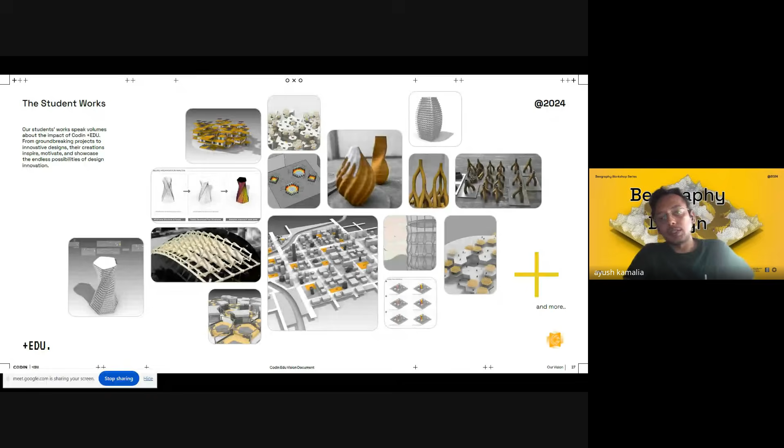It's me, Safid, and Divya, who will be taking care of the workshops today. Our mission and some of the works from our previous courses: both online, offline, digital fabrication, sustainability. So it's like a big range of courses.

Without wasting any further time, we are done with the intros, and let me just quickly tell you what is on the cards today. So this is workshop 2.

There are a total of 4 workshops in this whole series, once every month. It is usually on the second Saturday of every month. So the next will be happening on the second Saturday of September, and the final one in October. And we are going category wise.

Today we will be looking into 3 categories. The first one is lighting fixtures. This will be happening at 12:15 to 1 GMT, so just convert it into your local time. This is the kind of things we will cover in this session, which will be the first session of the day. Then we will have a small break and a Q&A session.

And then we will go to the second category for the day, which is DIY and engineering. Divya will be heading this. He has a master's in digital fabrication design from UCL London and is a domain expert in this area. We will be learning to create a frame of a drone which you can 3D print at your home.

And the final session today will be from 2:15 to 3, which will be about urban furniture, and we will look into these kind of waffle outdoor furnitures.

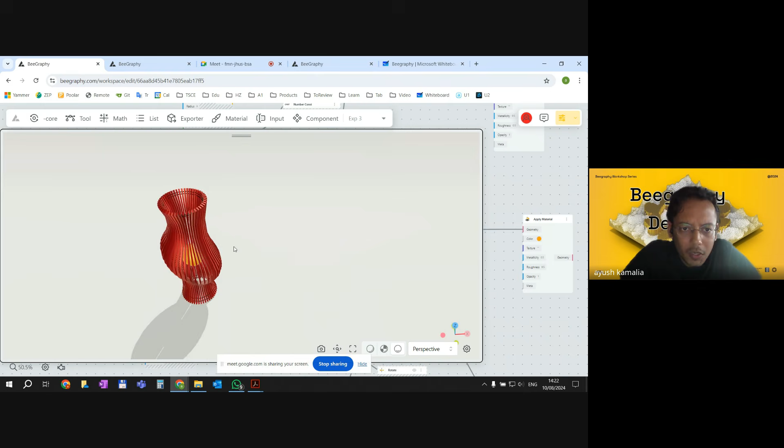So what happens when I see the geometry, what I realize is that it is predominantly an extruded cylinder, but there is this tilt in the center. If I look from the front side, I realize that this bulge is not parallel to the horizontal plane.

Like if there is a circle here and a circle here, this circle is not straight, it is not parallel, it is somewhat tilted. So if I just try to draw it, what it may look like, let's say this is our circle on the top, this is our circle on the bottom. Rather than being parallel to our two circles, the top and bottom, this seems to be tilted in this fashion, the one which you can see in the red line.

Exactly. So this is somehow we want, this is like the first apparent thing which I can see.

Again, one thing related to parametric design in general, I would like to share that there is no right or wrong method in parametric or computational design. There are hundreds of ways that the same result can be achieved. In the time constraint that we have today, I will be following one or two approaches to reach this particular end result, but that doesn't mean all the other ways of reaching the same form are wrong. There is no right or wrong, there is just more efficient and less efficient ways.

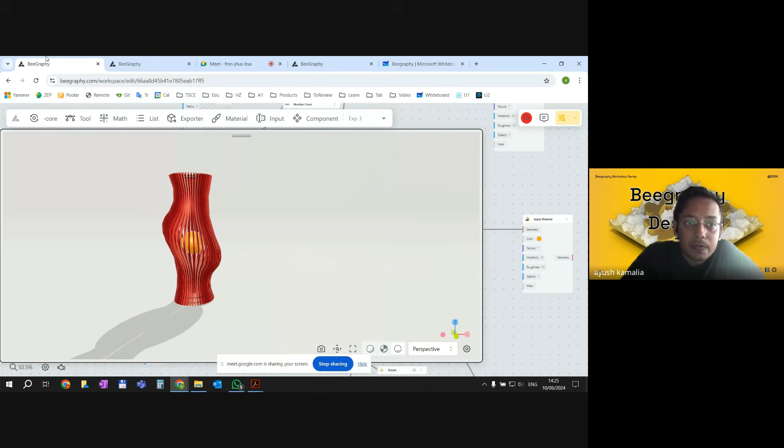So one thing we are clear on now is that there is this one circle we want on the top, which is horizontal, one circle we want on the bottom, which is again horizontal, and then there is the tilted circle in the middle. If we are able to somehow connect all of them smoothly, we get closer to what this form is trying to achieve. But certainly not in two dimensions, it is all happening in three dimensions, in circles and cylinders.

So let's be easy, let's start slowly and put these three circles in and then see what happens. Let's start with the bottommost circle, and you can choose whatever size. It's mainly based on proportions rather than trying to identify the actual size at the moment, because we are in the exploration phase. So let's say I am having the bottom radius, which is this red circle, as 3 here.

The good part about BeeGraphy is that I do not need a separate component or element for all the input. In Grasshopper, it's not very easy to embed the inputs, it's more preferred to add them through a panel or a number slider. But here, I can just click on the numbers after this to change them. So if I want a radius 3 instead of 4, it is much quicker.

If I do something in this fashion where I create a number constant and write the number as 3 here, and then connect it to this one, it gives us the same result, the circle is exactly the same. It's just that if I write the number directly here, we are a bit faster. But if you want it to be a parametric component, then we can definitely add a range or a number slider if we want it to be varied. But let's start with a simple approach where we can directly add the number here.

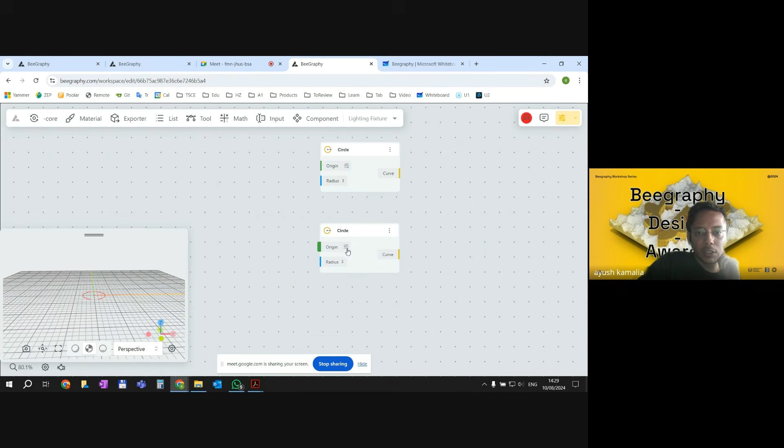So, bottom and top circle, the radius and size are exactly the same as in this geometry. It's just that rather than being located on the ground level, it is on a higher plane. How can I define a higher plane? The radius is already 3, so I can simply change the z point to a positive higher number. If I do that, I see this circle is now placed here. If I play around a bit, if I put 10 here, it will be at positive 10, and if I do 20, it will be at a higher level, and so on. Let's go with 21 at the moment.

So I need 3 circles. I have the top one and the bottom one. Now let's get the tricky one, which is the center. We already know that the center circle will be slightly bigger. So to have a slightly bigger circle, the simplest method is to just increase the radius of the circle. Let's try to do that.

I'm copying the circle at the very bottom. When I click this, the yellow thing appears here, which means the circle is located here. We already agreed that we need a larger circle, so its radius should be higher. Let me increase the radius to 5 from 3 to make it a bit bigger. I can see there is a larger circle now, but the circle is not here - it's somewhere in between the top and the bottom circle. It's at 0 z point, and this is at 21 z point.

So let's take 10 or 11 to get the middle point. To change the location of the circle, I simply change the value in the origin. So remember, if you want to change the location of your circle, change the origin point. If you want to change the size of your circle, change the radius. We used both of them now.

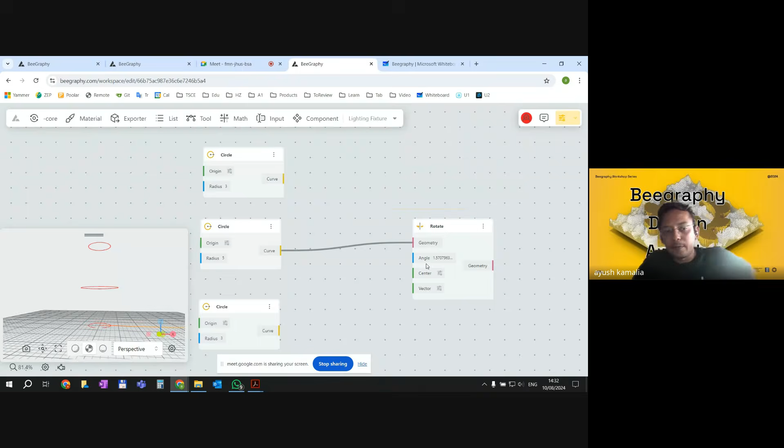Angle - this is one thing to remember: the input for all components, wherever an angle is required in BeeGraphy, is by default in radians. Personally, if you're familiar with radians, you can directly change the values here, but I'm more familiar with the degree convention. So there's already a command called degree to radian, DEG to RAD. I can just use this command and add it here, then choose the value here. Just as a placeholder, let me put 45 degrees for now.

Okay, now I have to put center. At what point would I like to rotate this? What is the axis of rotation? If we go back to our small ugly design, we can see that we want to rotate our central circle. This means what we want to rotate along is this point, the yellow point, which is the centroid or center point of this blue circle here. But I do not know what is the centroid of this blue circle, I just have a circle right now.

So to get a centroid, again very intuitive, very simple, I just type centroid to get the centroid option. I put the circle into it, and then I get the centroid, which is this yellow point, exactly the same yellow point which we are expecting to rotate our design at. And then I connect the center point to the center here.

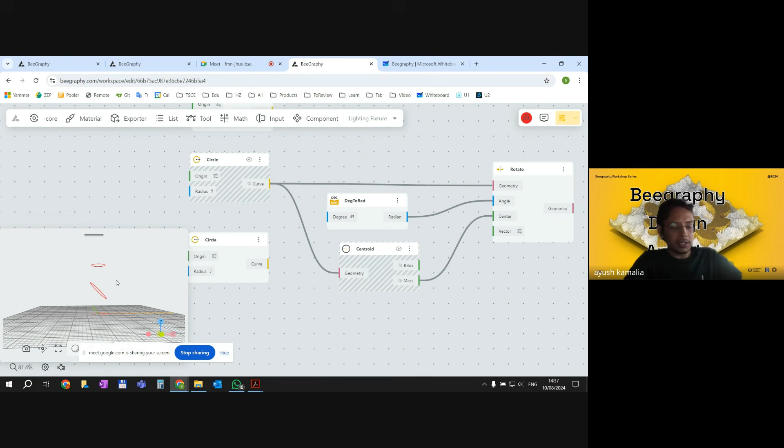Great, our first step is fully done. Now, what was our next step? Our next step was to create a smooth boundary around them. You see the new yellow thing which I'm adding, we now somehow have to connect them as a surface rather than being individual circles.

The immediate thing to do is to use a command known as loft surface. Now we simply have to add 1, 2, 3 curves in it and then see what happens. It is important that the order of the curve that goes inside the loft is maintained, so either go from top to down or bottom to top, but in the correct order.

A more clean way to do it is to use this component known as merge. Merge combines all the data streams, the data coming from these 3 curves, and then it will be lofted together. So going from bottom to top, I add the first curve here, the second curve, which is the middle one, by pressing the shift key, and then finally the third curve here. Then if I add it to the loft command, I see something happens.

But I realize it is not what I intended to achieve, it is not looking like this. Because what is happening right now, if I just draw a quick sketch again, I have one circle here, a second circle here, and a third circle here. If you just see this geometry, this is what our situation is. And now lofting the 3 of them, it is combining the extreme ends of the three together in something like this.

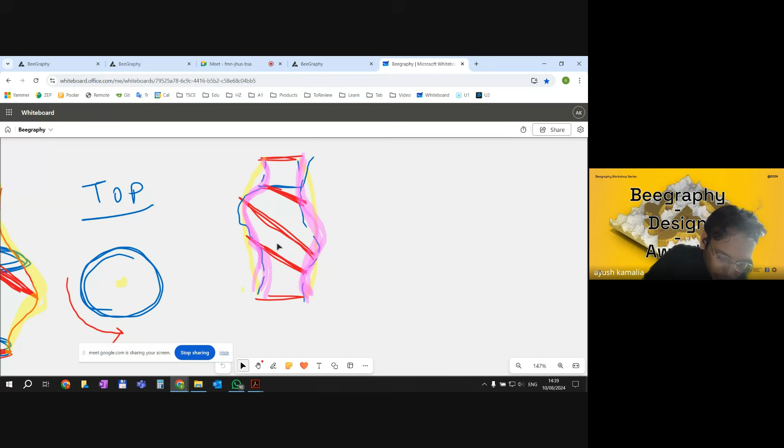This bulging thing, shown in the blue dashed line, is not happening. So how can we achieve this bulging? If we add one more circle here and another circle here, it will try to follow the outer points of all 5 circles instead of just the 3 circles. So hopefully, by adding these two circles, we are able to get closer to the form here. Let's try that and see if it happens.

One thing is, let's give it a slight thought whether we want to add a circle or an ellipse here. You might be wondering why the ellipse is coming into picture. If you see, this circle is actually like a tilted or rotated circle.

So what happens if, let's say this is my circle, if I rotate it, it will be rotated like this. Its width is getting reduced. The pink line, you see I'm getting like a gap here after rotation. Let me show it on the top view.

This is the top view. If this is the circle, I'm drawing the rotated circle with red. This will be the rotated circle. But I do not want this. We want the circle to be precisely a cylinder in the top part and the bottom part.

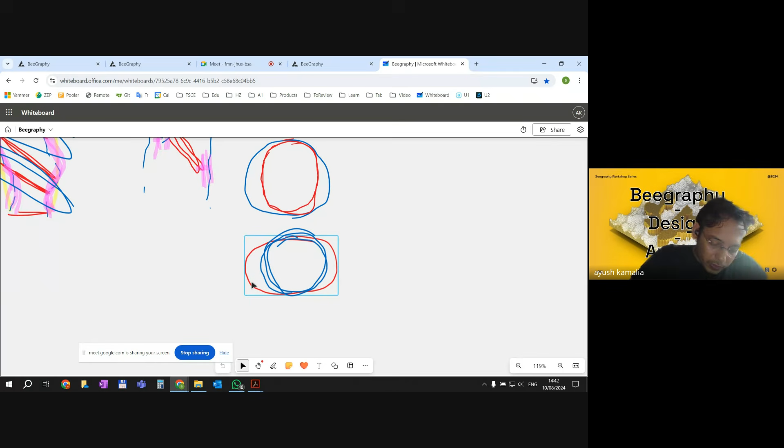Going to this drawing again on the left, we wanted to have the cylinder. This is the circle on top. If I have an ellipse here, slightly bigger on this side, after rotation I will get an ellipse having the same dimension as my circle on top. This is because we are rotating it.

It is better to go with an ellipse, and then we can get a perfect cylinder. You can try it with a circle as well, give it a hit and trial, and see whether you like that feel, that appeal of the circle. Otherwise, go with an ellipse.

And if I want an ellipse, what I will do is just type an ellipse. Right now, I cannot see where my ellipse is coming because I have this lofted surface here. So to hide it, we can quickly go to the lofted surface and press hide. And then things become much more cleaner again.

Okay, my ellipse is here. I want it to be somewhere here. I know that this was my center point, which is 10. I used it for this circle. So I have to go higher than this. I can just put the origin on the z-axis to 13, 14. I can't decide, so let me put 13 and a half.

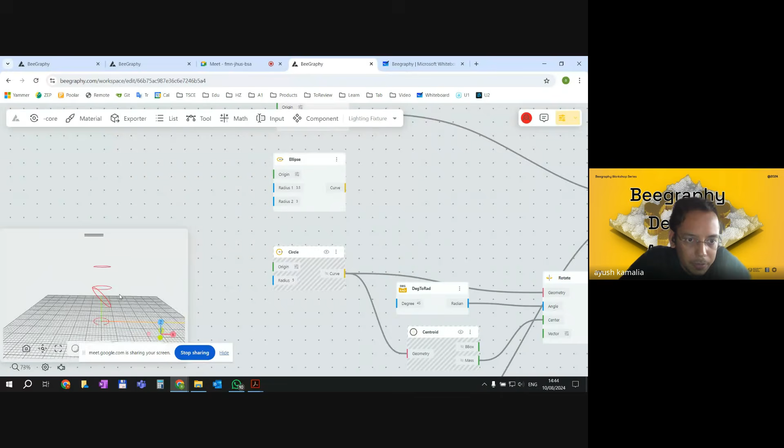Perfect, so now I have an ellipse here, but it is not rotated yet. I need to rotate it exactly the same way as the circle in the center. We have to follow the same approach that I followed here for the center circle.

We use the component known as rotate. Simple, rotate geometry goes to geometry. To rotate around a certain axis, I need the center. Again, centroid, curve geometry, centroid, and the point goes there. I have the center here now. I do not want to see this point, so I just hide it.

How much I want to rotate it is exactly the same as this one, so I can directly connect the same radian input which I created for the center circle to attach here as well. I see it doesn't seem to be rotating around. It's again the same thing, we need to decide the axis it's rotating along. By default it is along the z-axis. I put the z to 0. We want it along the y because we did the same for the center one, so I put the 1 to y.

It looks a bit messy. If I just hide it, I can see clearly that now it is more or less the same size and it is getting sliced properly. But I think that this angle is very strong right now, I need a slightly lesser rotation. So I can change the angle here to 30 degrees and see what happens. But visually, it looks pretty fine to me at the moment.

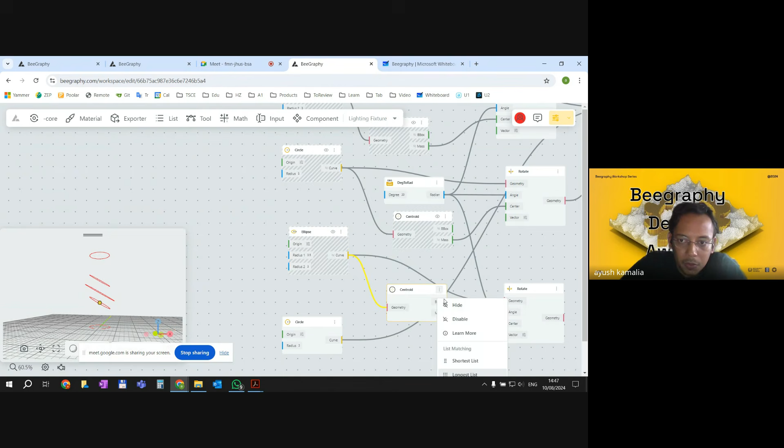And now we have like 5 circles here, exactly the 5 red lines that we wanted to have. And the good part is, if I change the angle here, all 3 angles get changed together, which is pretty helpful for me.

Okay, now let's add all of these 5 things to the loft and see what happens, whether I'm able to achieve the geometry I imagine or not.

If you remember, few minutes ago, I told you that it is imperative to go sequentially in assigning the surfaces, assigning the curves. So you can either go top to bottom or bottom to top, but they have to be in series. I cannot insert this circle in between the already merged list, so I start providing all the data right from the beginning.

Again, going from bottom to top. So this is my extreme bottom ellipse. This is my ellipse right on top of it, so keep pressing the shift key and add it to the list. This is my ellipse, this is my circle, central circle, the biggest one, keep pressing shift, add it. Now I want this ellipse, which is this one precisely. Yes. And now the top circle, which is not this, but the one at the bottom in my case. And this. So it doesn't matter where the stuff is located on your canvas, just the order of providing the input to the merge list needs to be taken care of properly.

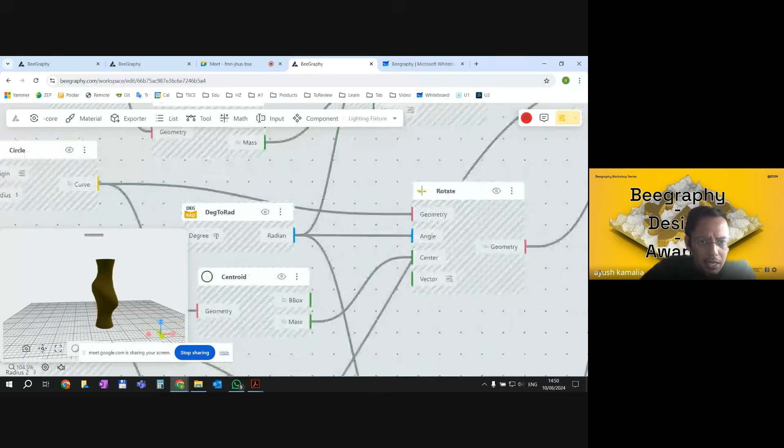If I change the angles, let's say from 30 to 35, okay perfect, change a bit, everything, and it looks good.

Let's say if I want it to be a bit taller, I can just change my top circle height a bit. So right now it is at 21, let me make it 24. It's higher, great, I like it even better now. So let us go ahead with this.

It's very important to understand parametric design is about parameters, and you are allowed to change parameters anytime during the workflow. Creating an algorithm is not a linear process; modifying the geometry and form is based on how you want to achieve it. So I like this one better now, I just go ahead with it. It's not finalized yet, I'm just writing a script right now. After 10 minutes I may come back and change some parameters again, but I don't have to write the script again, I'm just changing a few parameters and getting a new form out of it.

So this was the most tricky and parametrically intensive part, to identify exactly what we are doing. It's very interesting to see that with just basic primary geometry like a circle, we are able to get this parametric form.

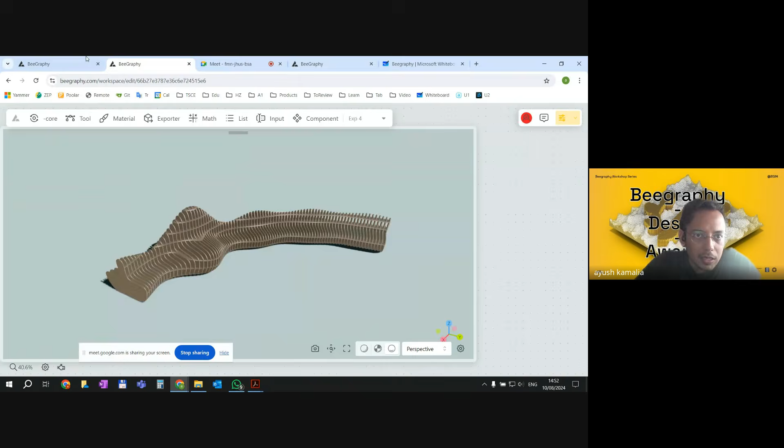Now I want to create a finned structure with a width to it. I don't want a surface, I want these individual panels rotating around. For this, I need a thickness, how thick I want these panels to be. If I want to add thickness, what command can we use?

Solid thickness, no points for guessing this one because as you know, Grasshopper is very intuitive. Whatever you want to achieve, just try to type it out and there's a very high probability you will get a component which does exactly that. So what kind of input needs to be provided? It just needs a surface and a thickness, how thick I want it to be. So it converts a surface into a solid of a particular thickness.

Right now the solid thickness is 2, the surface is the surface input. Let me just provide the surface and see what happens. I hide this one. It is extremely thick, I have no space in my geometry.

So I want it to be thinner, but I want the mass, the thickness being added, to not be added inside the geometrical surface but rather outside. What we can do is simple: rather than having a plus dimension, let's add a minus in front of it. So rather than +2, if I do a -2, what happens? Now the whole thickness addition goes to the outside, but it's super thick for my taste right now.

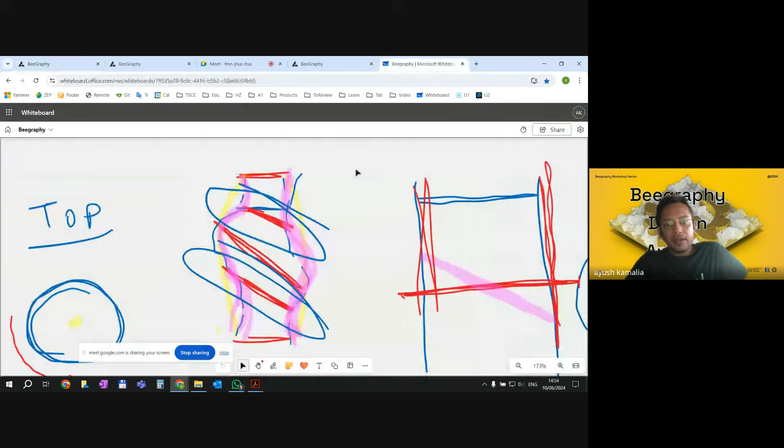So you see, in just 20, 30 minutes we are able to get this solid geometry, which looks pretty cool. But at the end of the day, what we are creating is a light fixture. This is a solid, there are no gaps for the light to come out from this one. So I need openings here, just thin slits rotating around.

And how can we do that? For that, there are thousands of ways to do it, thousands of permutations and combinations, but we're probably going to go with something related to solid intersection, and then create these individual slits. So how does a solid intersection work?

Let us see on this canvas itself. If I have a solid cuboid, and then I have another solid cuboid with some part where they are overlapping, the place where they overlap will be the result of the solid intersection. So what is happening is that I provide two solids as input, we intersect them, and whatever is the common solid between these two will be given as the output.

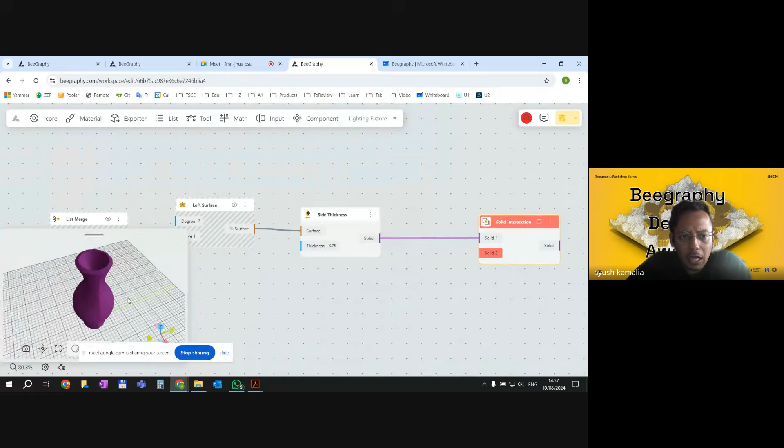How about we create plain rectangular slits, rotated around the geometry, and then we use them. Let me show you what I mean.

Let's create a plywood panel with some thickness, like a solid cuboid, a box. So let's create a box kind of thing. But this is not the ideal box. There are other ways to create a box. Yes, I can create a box by 2 points.

Perfect. So I need a box which is at least the height and which is intersecting. Let me show you again what I mean.

Let's say I already have this solid geometry. It doesn't look like what we have, but just imagine that it's the same thing, the red geometry. What I want to do is create a cuboidal box here. And when we intersect them, what will be the result? It will be one panel of lighting for me, a single panel.

And then I can copy the singular slit, rotate it around, copy it in a circular fashion, and hopefully I will be able to achieve it. So let's give it a try.

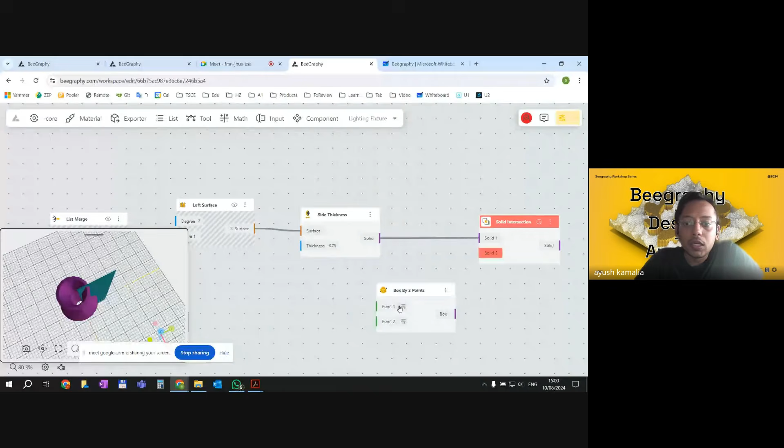So yeah, this looks good. I have a solid box. If I intersect them, let's see what happens.

The Boolean operations are pretty computationally intensive, so it takes some time. Let me hide them and let's see what happens. It's the reverse thing that happened. I actually wanted this slit thing to remain, but it created the other one.

So what we will do is just shift, we can change solid 1 and solid 2.

To remind you, solid functionalities are pretty computationally intensive, so use them wisely, do not change them too often. Okay, something is not going as expected. Let's keep on creating our stuff.

And then let's see what happens in the very end. In the meantime, I can disable this component so that it doesn't take our computation power.

What is happening right now is there is only one panel. We want it to be there all around. So how can we do that? There is something known as a polar array.

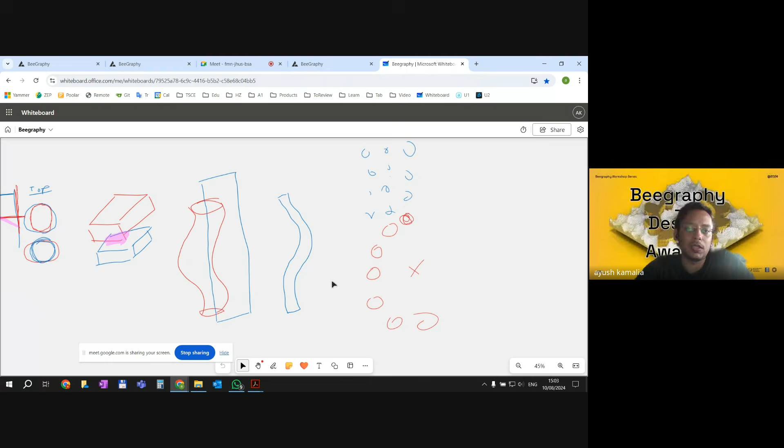Then let's do polar array. I want the box to be moved, and perfect, this is what I expected, that it is rotating all around.

And we can just directly set the count here, how many boxes we want. Let's say I want to have 25 boxes, so let's say 25 slits around. You can change how dense you want it, how much light you want it to be coming out.

But yeah, pretty much sorted, I have a polar array working well. And then let us do solid intersection again, let's try if it happens this time.

And this is the geometry. So I want my central solid to be intersected with all of these panels, and the resultant should be our panel creation.

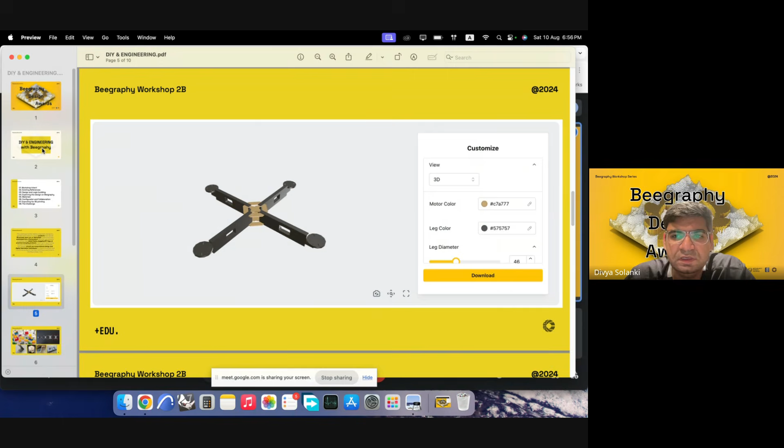It can be 3D printed or laser cut. There are other examples as well, like toys, drone frames, phone stands, small laser cut objects, stands for tablets, or any fixtures that could be utilized in the house. We can also use it for molds, for construction, or to be used for other fabrication technologies like pottery or lost wax casting.

So what we'll be exploring today is a drone setup. I'll take everyone again through the parts. Everyone is familiar with the object - it has a body in the middle, and arms on four corners. These arms are then attached to a propeller unit. The propeller's function is to raise it up by rotating.

So it requires a power source, provided by a battery. Most drones have camera units, but they could add additional functions to the drones. We can see there's a camera unit, and an antenna which would link to the control unit in our hands. So that's the general assembly.

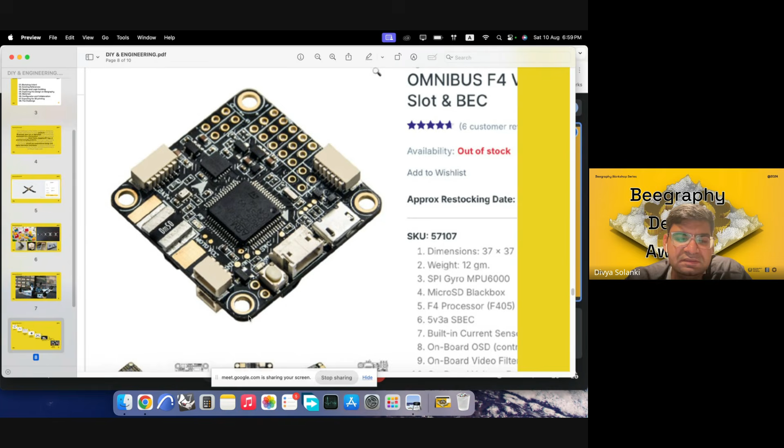After that research is done, it can help us in modeling, because each of these units would come with certain connector dimensions. So this one has screws, and this could be attached through screws or nuts. We need to understand what the sizes of those are. Once market research is done, it can help us in modeling.

Once we have modeled, we can then start fabricating. After fabricating, we go back into a feedback loop - if we face some issues, we go back to the fabrication or we go back to the modeling. That loop continues until we have a refined product that is tested. So yeah, that's the general DIY workflow.

Market research can easily be done online. You can find various websites which give you parts, some of which can be very cheap to acquire, so we don't have to invest our time and money into modeling them or 3D printing them. We also have to look for these connector parts, which could be very useful because we already know what is feasible, and then we'll make connections accordingly.

So today we'll try to attempt the drone body. As you can see, there's a central body and there are 4 arms on each corner. I'll take us to the whiteboard. Is the whiteboard visible? Yes, okay, I see it.

So I'll start - we need to break this form down into parts that we can then fabricate. The first part I see when I look at this geometry is that we require a squarish body, which is the center part, and then we require arms coming out of the squarish body on either corners, on all the corners. We can use operations such as solid union to join them all together so that they become a single body part.

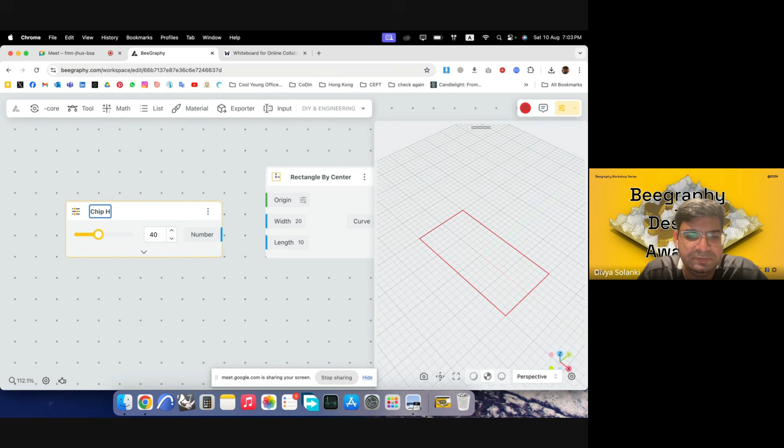I'll write 40, and I'll go with a range input so we can use it for the configurator mode. I'll write chip housing, so chip housing dimension, and this will go into this and this.

Now this is the size we require for the chipset, and we'll make a frame out of it which is slightly larger. So we have made a rectangle, and we can try making another rectangle which is slightly larger.

Here I would try to make it parametric, so say I want the frame width to be around 10 millimeters or 1 centimeter. I'll use a range input, and I can rename it, or we can just say body frame. Then what I will do is add this frame to the chip housing.

So basically I have an inner one, and then I want some distance of that housing from the edge of the body so that we have some stiffness in those areas. So this is where the chip will house, and this is the frame of it.

Now we want to develop the parts where the arms will attach to the body. So for that I will first -- this particular geometry has been generated from the origin point, which is in the middle here.

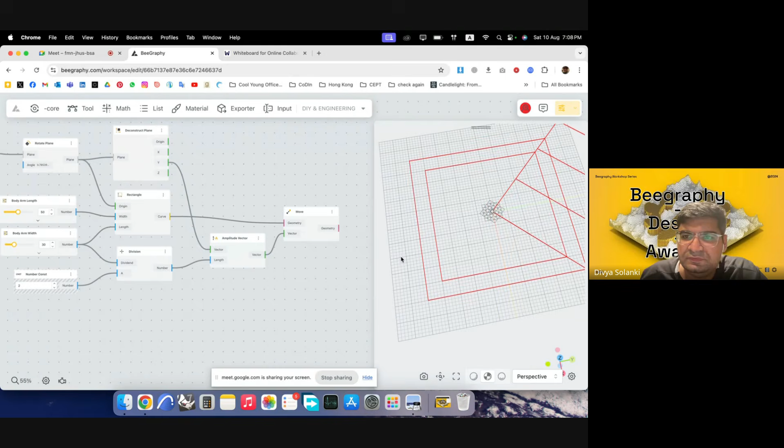Oh, it was the y direction. So if I preview... oh, this has gone further. So we need to give it an opposite vector. I'll use opposite to change my positive number to negative number. And then we can see it is now in the center.

Great, so we have this particular arm. Now we can rotate this arm around so that we have 4 of them attached to the body. I'll hide this and use polar array. By default, the count is 4, and the angle is 360 degrees, so it would by default do what we expect it to do. I won't be changing that, but we can always introduce or increase the number here.

Point is the center point. Again, by default that is the 0,0 coordinate, so I won't have to change that. Vector and angle, it's in radians right now, that's why it's written 6.

Okay, so we have the body and we have the arms. Maybe I can increase the body size a bit, I can go with, say, 50, so that it's slightly outside. Let's try to merge all of these shapes together, so I'll introduce a component called region union. We can use this to merge multiple closed curves.

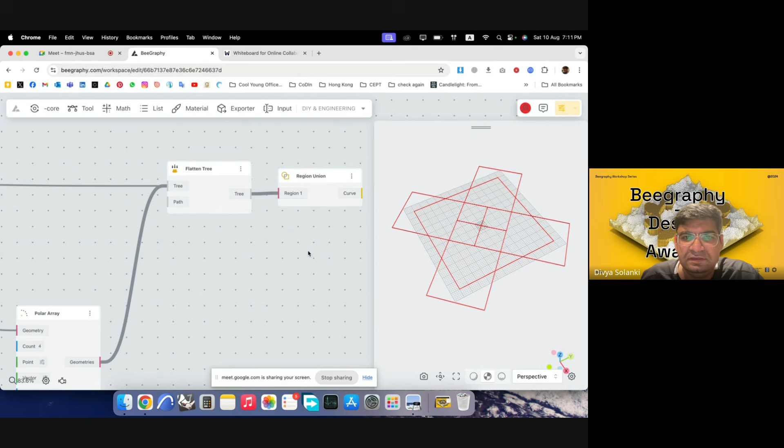So we would have to flatten the input first, so I'll use flatten tree for that. I can press shift and control to plug all the data into flatten, and then send it to the input. So I'll preview of this whole previous part. As you can see, we have a body now, outline of a body now.

We can make it a bit smoother, I guess we can use... we had fillet in this, but we can also try chamfer. So I'll just use chamfer curve, I'll put in curve, and you can see it is asking for two inputs for the chamfering.

So we can go with, say, 5 millimeters range input. I'll change the name of it to body chamfer. I'll plug this in to both of the inputs, and I'll preview of the previous part.

So we have the outline of the body with us, we just need to extrude this. If we extrude it without making it into a surface, then we will only have the outer walls. I can show you that: extrude curve. So when I do this, I only have the outer walls, I don't have the base.

But we can use capping for making it into a solid, so let's go ahead with this only. I will just copy the previous slider, change this to body height, and I'll plug this in. Oh, it needs to be a vector, sorry. So we'll introduce a Z vector, plug in there and put that here.

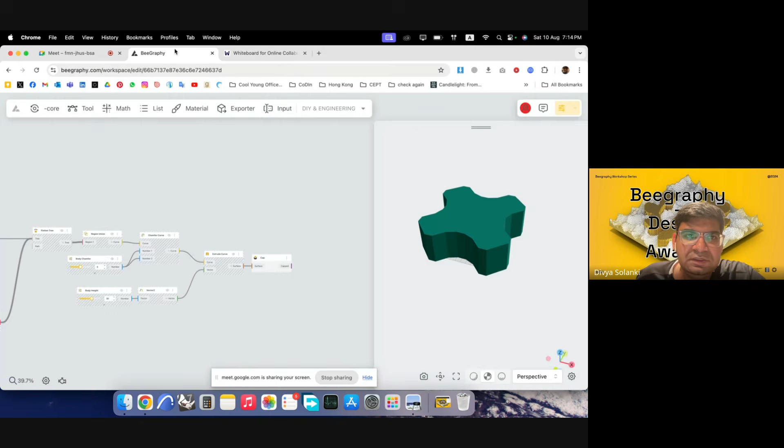So the first part is we require a housing for the chip on the top, and then we require a housing for the battery on the bottom. So we can start with, I think, the chip first. We require, again, we'll go with solid operations. So we are required to make a rectangle above here, and then we'll subtract the rectangle from the body.

So if I go back, I already have that rectangle ready on the base. Now I'd like to move this up to this part because I want to subtract it from the top, so I'll use move.

I'll give it a direction, which is Z. We already have a height for the body, so I'll just move this component ahead. We already have a height for the body, which was this one, and it already has a Z vector, so we might not even require it to be given. So our rectangle has moved up.

Maybe we can give it a fillet so that it's a bit smoother. Fillet geometry, I'll put this in, and then I can give it a radius, say 5. I'll go with a range only. So this would be chip housing fillet. I'll put this here, and I'll preview the previous one.

As you can see, we have an outline for the housing. Now we would want to develop a solid here, and then subtract it from the base. So for that, I will extrude this geometry down.

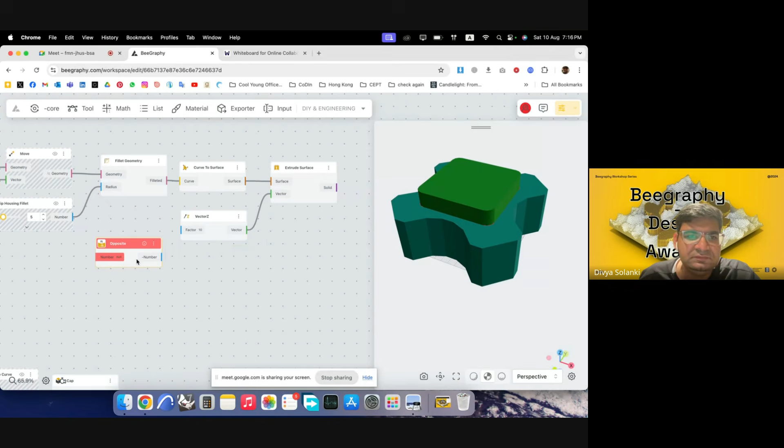It has to be extruded in the opposite direction, so we'll give it a Z vector, and then give it an opposite, and then a depth. So this would be chip housing depth, and I'll put this in here.

If I click on this, it might not be visible. I can preview this off for now. Yeah, so we have an object which is going down, extruding down.

Now we'll subtract this object from the other object to get the difference. So I'll use solid difference, and we have solid difference. What we'll do is give it this first and then this, at zero level, zero level.

Maybe I'll try to swap these two and then preview. Yeah, so we have a cavity there. I hope it's visible, the color is a bit dark. But yeah, there's a cavity, and then we can always increase the depth of the housing if required, or decrease the depth. So that is where our chip will be stored.

Okay, great. So now we can move on to the next part, which is the housing for the battery at the base. The battery also comes in multiple sizes, its height could range, it could be two batteries together, or a bunch of multiple batteries together, because the propeller can be a bit power hungry.

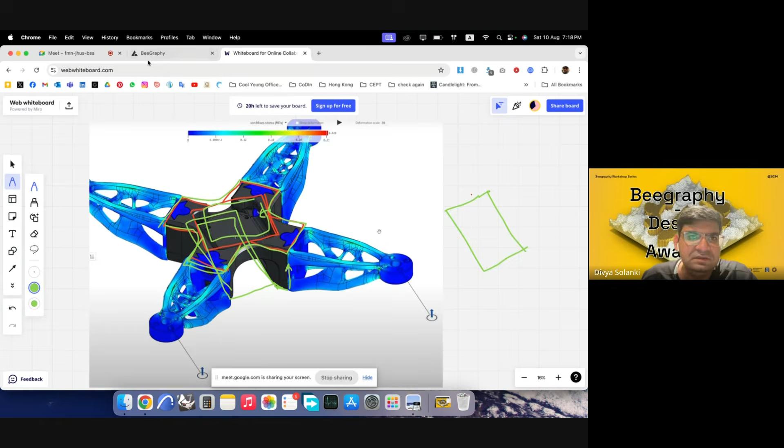So we can go with, say, 30 range input. This would be our battery housing width. Then I'll copy this down, and I'll change this to housing length. This goes here, that goes there.

I can then increase this to, say, 60, probably more, 100, so that it goes slightly outside of our drone body, so that I can subtract and have a cavity here. So I think this would work.

Then what we can do is extrude, or maybe first make it into a surface. So curve to surface, and then we can extrude this curve, extrude the surface, and give it a height.

We want it in the Z direction, and then we can go with, say, it's 10 right now, we can keep it 10 only. So 10 range input, and we can change it to battery housing height. I'll put this in here.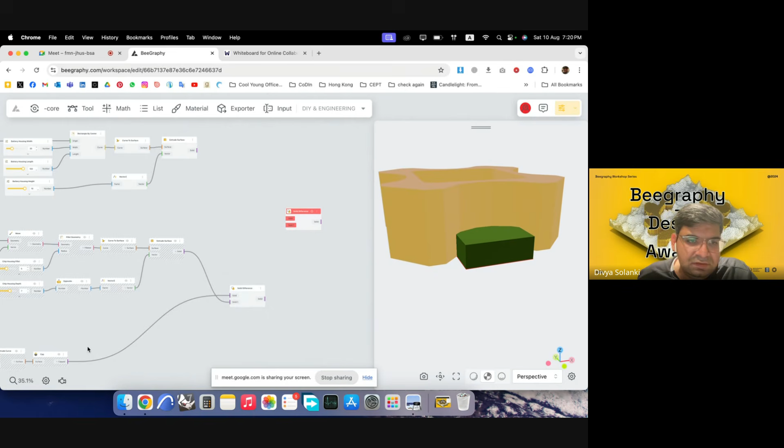Great, so now we have that. And then if I take this forward, we can then Boolean. So again, Boolean difference, just like difference, solid difference, and then it looked like this one would go into this, and this one would go into this. And then I'll just preview.

I think it did the opposite, so I'll just use this and this. Okay, maybe I'll just move the plane a bit lower, say by 1 millimeter.

Would you guys know why this might be the case? Try reloading the script once. Okay.

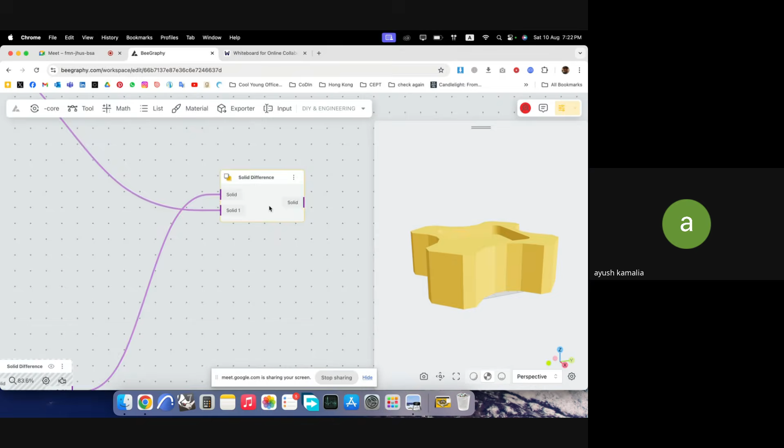It was working previously. Yeah, there might be some backend issue at the moment, so maybe we can just proceed, and because the concept is...

Okay, what is the problem? It's just that there's two objects that I want to subtract, like solid difference, and it's unable to do that. If I increase the height, would that affect it? Like it's doing the other way.

Seems to be intersecting at least, I think. Yeah, it is, but for some reason it's not. Are there two geometries over there? Maybe blue and green? Yeah, there are two geometries, blue and green. Okay, seems to be not.

Can you maybe turn off the blue one for a second? Which one, the blue geometry which is there? Can you turn it off and just try the intersection with green and the magenta one?

It's still not happening. Interesting, I'll look into it.

Okay, anyway, we'll have that base. I'll show it, there's a script already ready on the back. I'll probably show it later. Maybe we can move on to generating the arms.

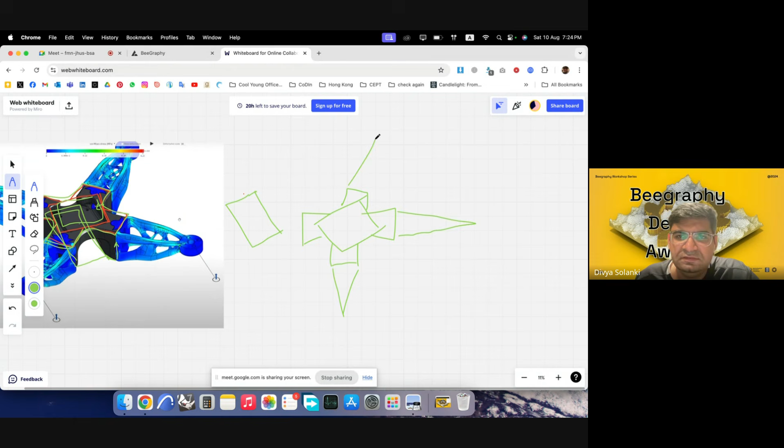These ones, so let's go ahead. I'll go back to the whiteboard. So we have a base frame, and then we have the arms that go out. And then we would require some units to be attached to these arms on which the propellers would be resting or housed. So what we would want to do is develop those.

So for that, I'll again use the origin point and I'll move it in the direction of the arm. So we'll try to develop one of the arms, and then we will polar array it on the other sides. So I'll go back to the origin point, I'll use move, and then I will use the deconstructed plane because that was the rotated plane to give it a direction.

I'll use amplitude. The vector could be x, and I'll move, and we have to move it, say, we can go with 100 as our length of the arm. So I'll change it to arm length. And we can see it has moved.

Oh, geometry, we have not provided it yet. So it could be this origin also. So origin, yeah. So that is how far the arm will go. So we'll be making a triangular arm here.

I'll move this a bit down. So the next thing we want is to make a triangular arm. We want these endpoints as well. So for that, maybe I can move this point again, but till this part.

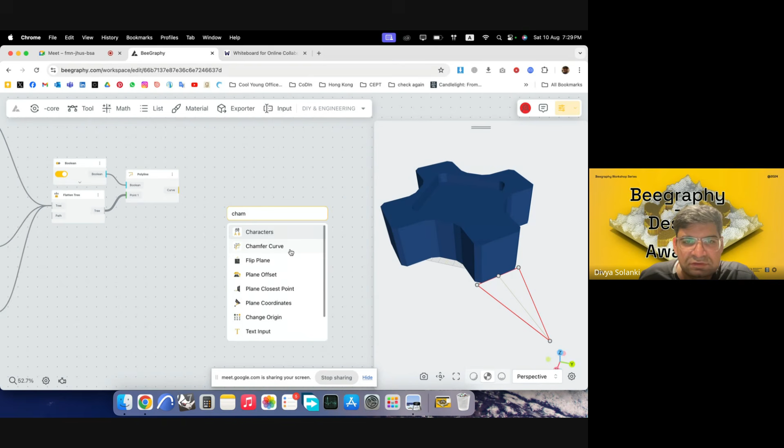Maybe we'll add a chamfer to this as well. So I'll chamfer the curve, and we'll use the same chamfer as we had previously. I'll take this down, and I'll again double click on the wire to give me a node. Then I'll put this in here. I'll hide the previous part, so we can see we have an arm now.

Now what we want to do is give it a depth, give it a frame width as well as a depth, so we can just offset it. I'll write offset curve, put the curve in. We want it to offset in the negative direction, opposite, and right now it's 2, or we can continue with 2. I'll use a range input for this, write it to be arm thickness. I'll put this in distance, and you can see it has gone in now.

And then we can loft between these two. I'll use loft again, and then put it in curve. So you can see it has made into a loft.

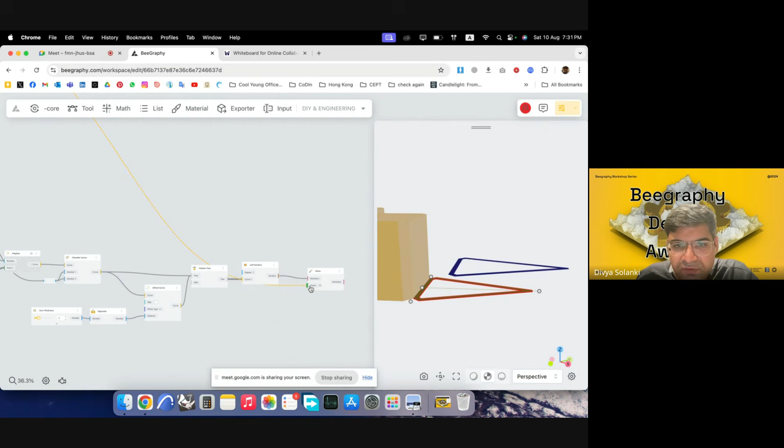And then I can extrude it. Or maybe I'll move it first. I'll move this geometry because I want this frame to be triangular, slightly inclined at the bottom. So I'll just move this up to this height, and we already have that height at the back. If I go to body height, we already have a Z vector for this, so I'll just plug this in to my vector. So we have this component there.

Now we can extrude it downwards. So I'll use extrude curve, extrude surface, and then give it a negative Z value, so Z opposite. I'll go into vector and give it, I guess, the same value as the thickness we were giving here. But it already has an opposite, so I'll just use the same. So we have the upper part ready.

Now we need to connect it like that. Maybe I can increase the arm's length a bit more, it's very squished right now. It's at 100 right now, I can increase it to say 300, and increase this to 120. Yeah, 120 seems fine, maybe 125. Okay, so we'll move on to the next part, which is making the inclined base. Also increase the thickness a bit more. I'll preview the previous part.

Now for making that base, I would first need to move this point up and then again make a polyline. So that point was this one. I'll use a Z vector to move this. So move, put the geometry into move and then vector, and then I can give it. This was moving, we already have that, the height of the body, so I'll just use the same vector, which was this one.

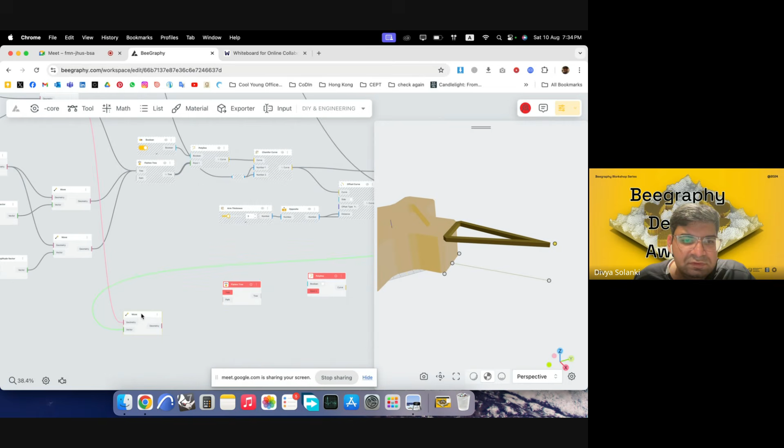Or extrude surface, sorry, not this one, I think this one. So now we have raised that point to that point, and then now we can connect all of these points together. So I'll just move it a bit back and make a new polyline. I will use merge list, so maybe just flatten tree. I'll put this in first, and then this one and this one as well. And then I'll put this into Boolean, and then put this in again so that it makes a polyline, a closed polyline. So we have this also ready.

Now we can use again chamfer for this. I'll push this down, use the same settings as the previous chamfer, hide the previous parts, and preview this on. So we can see it is also chamfered. Now we have that, now we want to give it a thickness, so I'll again use the same settings we used previously. I'll first offset this, so offset curve. It has by default gone outside, so we will use the same settings again which we used here. In distance, it has gone in now.

Now we will use loft. I'll just copy these two, copy these two again down, put the curve, the first curve, and then the second curve, and then we can preview this on. So we can see it has already lofted.

Now the thing that we want to do is extrude this. So I'll use extrude, extrude surface. We wanted to extrude in the Z direction only, so we can just use the same settings again that we have used previously. Oh, but this one is going down, so maybe we wanted to be going in the other direction. So I'll just use opposite.

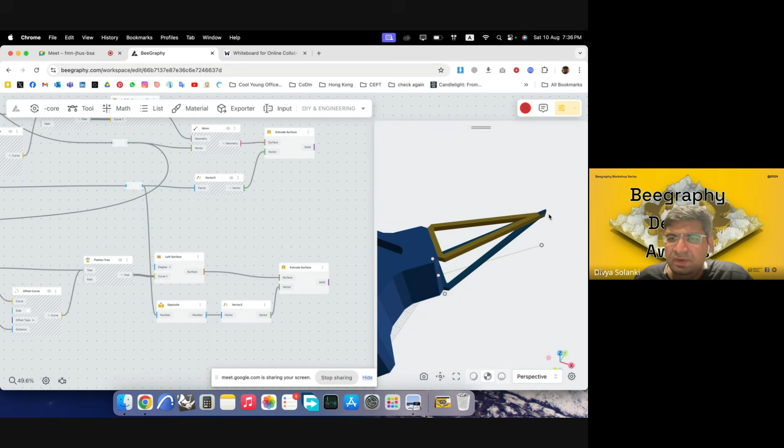Now let's try to make an attachment where the propeller will be sitting on. So we can just have a regular semicircle there. For that, we already have a point which we moved to that position. We can just use this point for making a cylinder, or we can just use it for making a circle. So I'll just go with circle, origin.

We can give it a radius, I'll just go with 5. I have to make this into a range input, and I'll change this to propeller connection radius.

It looks pretty small, so we might have to increase that a bit. There'll be 2 of them, one where it will be housed and the other one would be the larger one for giving it some thickness. So this one I can increase to say 10, and the middle one I can go with a small one, say 2 or 3. 10 is also a bit large, maybe 8.

And then I can loft these two together. Loft surface, I put this and this in. You can see I already have a surface. I can extrude this. Extrude surface, and I can give it a height. So that could be called...

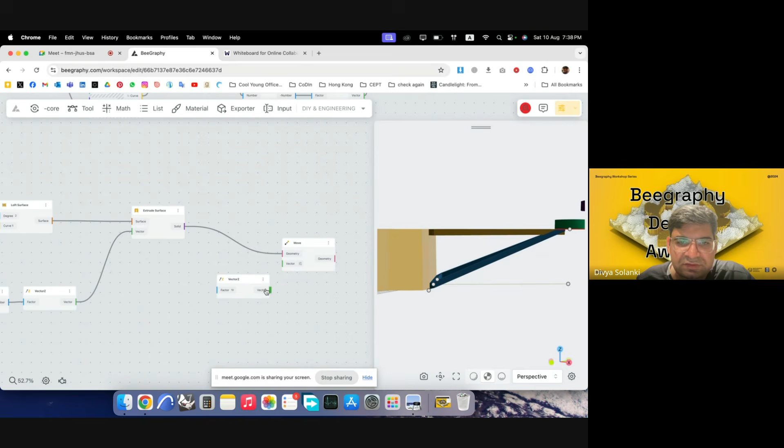And then it's going above our unit. Maybe we want it to be lowered, so we can just move it down again. So I'll use, and then I'll give it a vector, and then I'll just maybe push it down by half of the height. So division, this, and then divided by 2.

Put the... okay, sorry, so we have to give it an opposite direction as well. So the division goes into opposite, that goes into the vector. And I'll preview the previous part. Maybe it can be a bit more thicker, so I can increase the height. 7, no, I think 6 is fine.

And maybe we can increase the depth of these a bit more, they look quite flimsy. Thickness, so we can probably increase it to 5. Maybe 4. Great, so now we have these, at least the arms basic parts ready.

Now what we would want to do is have a connector which joins the arm to the body itself. So first what I can do is I can probably boolean all of these together. So I'll use solid union. I'll first put this geometry in, then I can just flatten all of these together. So flatten the tree, put this in first, put this in, and then put the top one as well, and then put this in into solid thing. It can take some time. Now I think it's done.

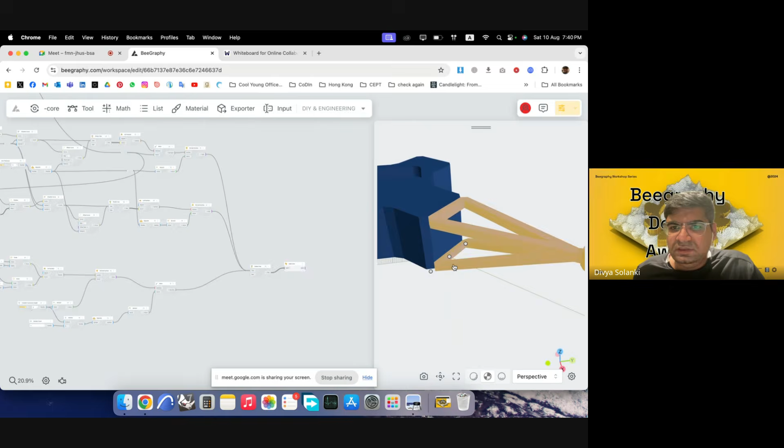I'll just hide the previous part. You can see it has been joined into a single object. Now we just want to develop a connector point which connects it to this body.

So for that, I can use, okay, let me hide this for some time. I can just go with, so if I'm drawing in a plan, if I have this arm which is sticking out of that body, I have the connector part which is taking a triangular shape and has a round hole. I can just use a connector which is going inside, but this won't help it stay. So I would have to give it some object that stops its rotation in multiple positions. So I can just make a cylinder there. A rectangle and a cylinder would do the job to help us connect it.

So I'll try to develop that at this point going inside. So we had that point, I think, I can just click this. Yeah, so we had that point here. We will just make a rectangle again from the center.

Rectangle by the center. Plug this in here. But you can see it is pointed in the world's origin point, but we want it in the other direction. So I will...

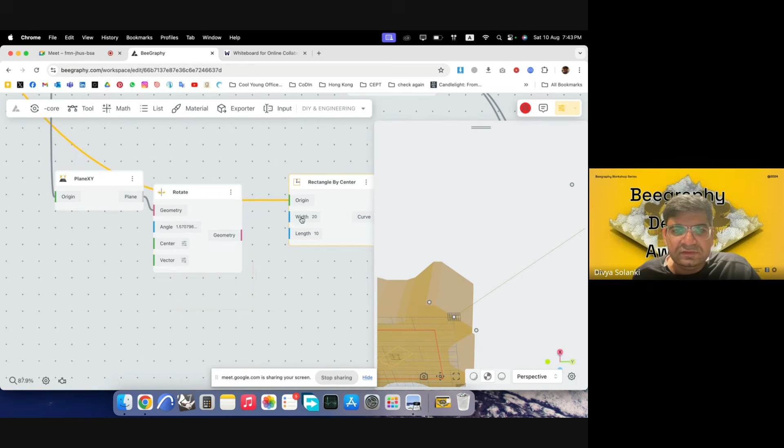Or maybe we can just... there is the point. What we can do is make an XY plane again at that point, and then rotate this plane. By default it will rotate to 90 degrees only. So that could become our new plane for generating the XY rotate plane.

So we have a basic rectangle ready there. We can give it a width and a length, so maybe 1 centimeter wide. I'll call this connector width, and we'll have a connector length as well. Put this in here, put this in here, reduce this down. Oh, I think I've put this opposite. But this should be width, this would be length.

So we have the rectangle for that position. Now we can have a circle here so that we can use for making the connection point. So again at this point I'll double click to generate a node. I'll move this point a bit back. We have a new plane, so we can deconstruct it again.

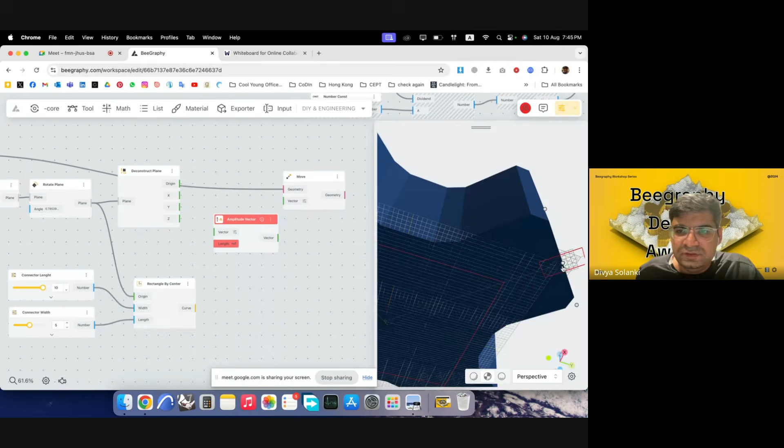Plane, so that we can get the directions, and then we can use it for moving the point a bit back. So I'll use amplitude vector. The point we would want to move, the length would be half of the length we have here, so I'll use division by 2 of the length, and this will go into our length, and the vector would be one of these directions, so we can check which one. Yeah, it's correct, it is the x direction. Just move this up.

Yeah, but we need it in the opposite direction, so we need to provide an opposite component. We put this here. So we have the point in the correct direction.

Now we can just make a cylinder. Or let's just make a circle, it'll be easier. So connection point, we don't want it to be too big, maybe we can just go slightly larger than our width. So our width was 5, so we can just go with 3. Range input, connector radius. I will put this in to this. Increase it a bit more.

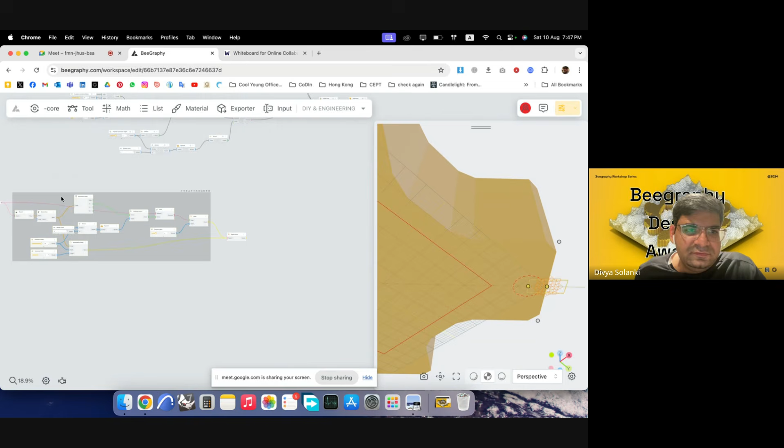Yeah, so now we have these two parts ready. Now we just want to extrude them up, but before that we can just join them together, so I'll use region union for that, and I will put this in and the rectangle in as well. So if I preview the rest of it, you can see we have a keyhole shaped connector with us.

Because we are dealing with DIY objects, when 3D printers come in play, we require some tolerances. So we cannot just subtract the same shape from the body. We require some level of tolerance outside, some level of slightly offset outside, so that the object can then fit inside. It doesn't have to be an exact fit because of the limitations of fabrication technologies. So we need to add some tolerance to it.

So I'll just add that tolerance here. It could be as less as 1 millimeter, half a millimeter or something. So I'll just add, for exaggerating it, I can add like say 1. Range input, I'll call this connector tolerance, and I'll put this in, and then I can use that for offsetting this curve. Distance, it looks a bit too much, so I'll just go with 0.5.

I'll just make a new one. I'll plug this into distance. So we'll use the outer one to subtract from our body, and then we'll use this one to attach it to the arm. So if I extrude this now, I can make a boundary out of it first. So I'll just put this in, and then I will extrude this surface up by the same height as the body, so that was... arm thickness. I've lost my own.

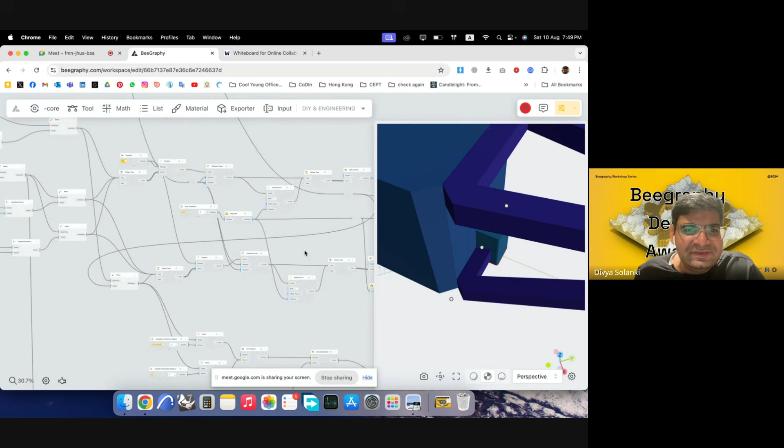I guess we need to introduce node search. Yeah, where did I lose it? There's arm thickness, where is our body? Oh, body's a bit up. Yeah, so there's body height here. So I'll just use this vector.

Right, yeah, so we have raised that up. Now we just need to... so we have it made in one position. We need to polar array it across. So I'll use polar array.

This one I'll put in the geometry. By default it is using the origin point, so it is coming in the correct position. And then I'll use solid difference. So I'll put these geometries into one, and then body is here. So I'll put this in as well.

And if I hide the previous paths, I'll just take it up. Maybe I need to do it opposite.

I think there is some... so solid difference is not behaving today. Yeah, it's not behaving today. Maybe I should flatten this. It was working previously. Yeah, there's some issue with solid difference. You have a bug, obviously.

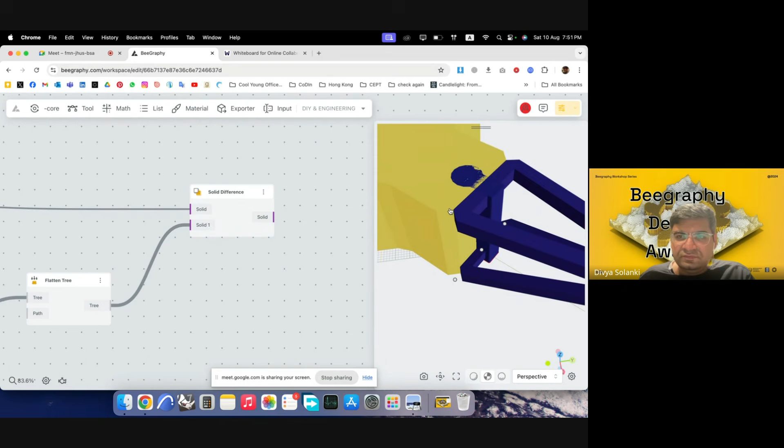Yeah, when was the last time you tried it and it worked? It's just today only. I made the script before and it was working. So might be some... maybe I can try increasing the height. Where is the Z vector?

There's still some issue with this. Yeah, to bet it happens on the live workshop. Anyway, I'll just... okay, I'll just show the other one. It was working on that anyways. So we can just move forward.

I'll just connect the body height again to this again. Yeah, so I mean, it should work ideally. It's probably just a simple bug.

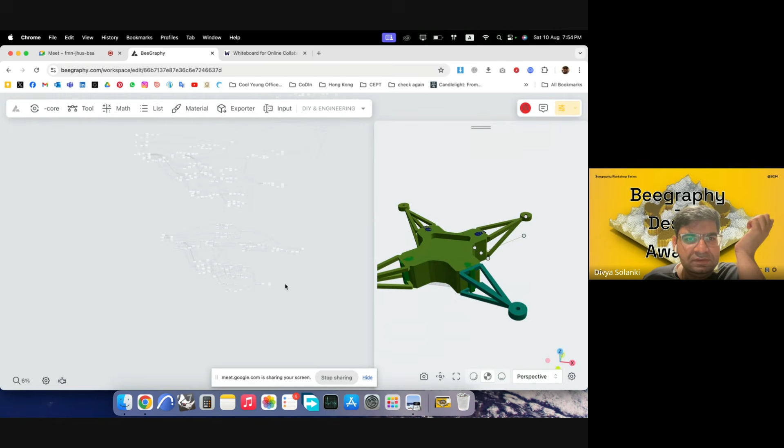Yeah, so that gives us the other arms as well. So then we can go around printing all of these individually. So for printing them, wait, what I can do is, I'll just disable this whole script. It's basically the same thing, and I'll just preview on my previous script.

I wonder whether it works here. Oh, it should, it is working. It has subtracted the outer shape, and it is boolean in here. It might be... I did flatten it, solid. Oh, does it go in the same, or was I using some other solid union? Might be the case, so it's solid difference that has an issue.

There's a solid difference also here. Yeah, there's a solid difference. Might be an issue with this particular component. Some simple bug, can probably be modified.

So yeah, the idea was that you just boolean this connector to the arm, and you boolean difference a slightly tolerance-based cutout into the body, and then you can attach them or assemble them together. This particular one also shows us the battery housing, which would come down.

And then what we can do is, for instance, we have this. If I want to 3D print this particular thing, I can type in STL exporter, and I'll just connect the geometry in. I can give it a name, say body, and then I can go into the DIY engineering, and I can export this one. The name will change once you refresh. So you can select this, and then you can export that in high quality.

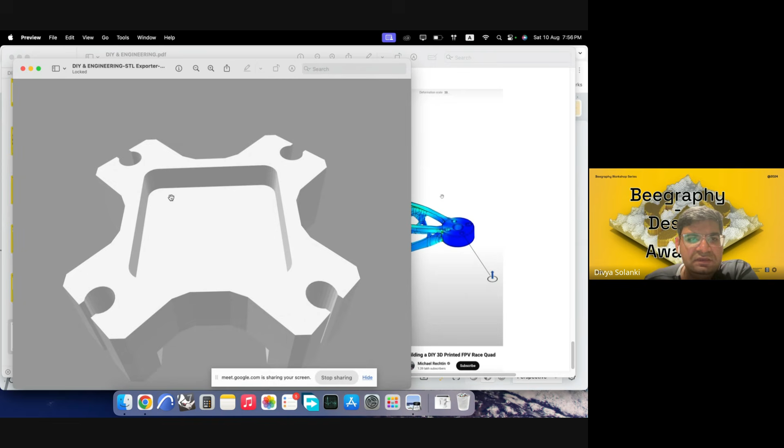One thing I'd like to mention is that I have not currently solid differenced how the chip will attach to this. So the chip will have nuts and bolts on all four corners. So we would have to provide more cutouts there for the screws to go in, as well as we require a housing or a connection point for the camera that will come on the top. So that also needs to have a few more holes on all four corners.

So you can probably see there are some holes here for connecting the chip, and then you have additional holes on these points for connecting the camera on the top. So you require a lot of connector points for this to work. And then some of the rest of the parts, like the propellers etc., can then easily be... it's not switching.

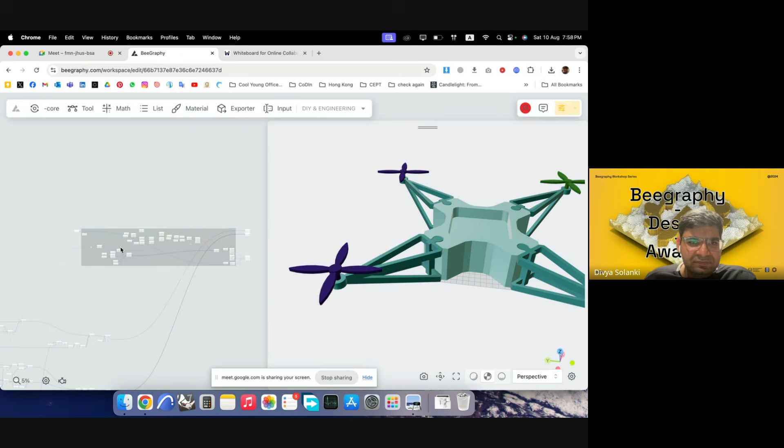So I've currently modeled them, but these parts could be easily procured from outside, and then we can develop connector points based on how they connect through real life objects, and then we can just use them right away. So I think this object can then be taken to configurator mode.

Because it's a solid difference file, it can take some time to modify, but you can see these are the other script parameters, and all your ranges will come here, and then you can modify them in the form through this, and this could be shared with the clients so that they can modify it and then give us an output.

And then there could be other ways in which you can simulate it, but because it is using online graphics, it can be a bit laggy, but then you can try various things. So yeah, it was a very basic exercise on how to develop a drone frame. Anyone has any questions on any part of it?

I like how you animated it. Yeah, it's a bit laggy, but some parts remain. Very interesting.

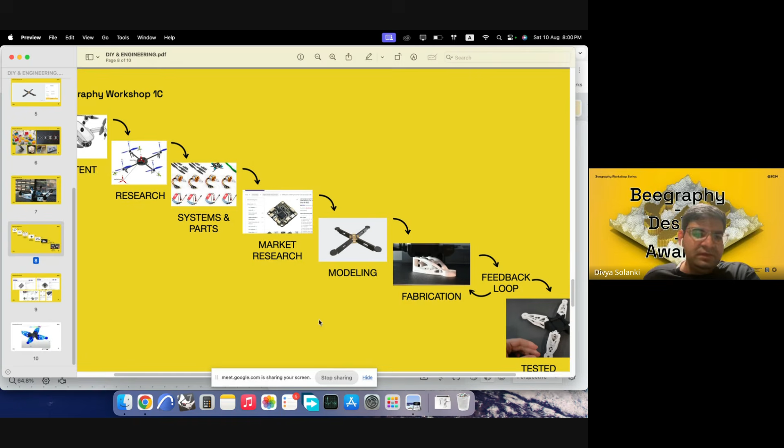Yeah, that feedback loop can help us a lot. So once you have fabricated something, maybe you will discover that the weight of the drone is too heavy. So you have loading factors. If the weight is too heavy, then you would have to decrease down certain parts of it. So the material needs to be optimized.

So the image that you see here is topological optimization, but it could be much simplified if you just have like a box, a simple frame outside. So various methods can be used for getting that real life feedback into the model, and then BeeGraphy can help us parametrically modify all of the components so that it makes our life easier and not model again and again.

Perfect. Great. Should we take a break? We are running behind our schedule, so maybe we can skip the break. What do you suggest? What if we make it very short? I thought maybe people wanted to go grab a glass of water or coffee. Yeah, always a good idea.

If anyone has any questions, it's the best time to ask. Alfia, I just read your response.

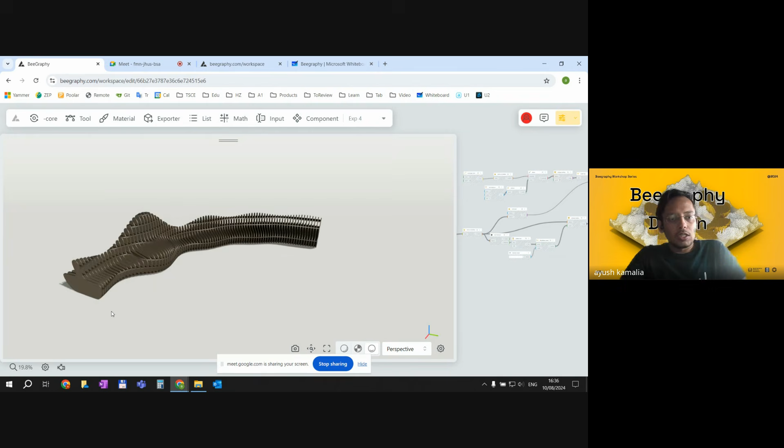There are different render modes that can be seen if you want to just play with the visualization. If it's a basic thing, we can directly get it out of BeeGraphy as well. And these are pretty cool views anyways.

So how can we approach creating this form? Let's create a basic outline of a bench where people will be sitting. For that, let's take this surface out and create it. There are multiple ways a surface can be created. They were already explained in detail, like some basic forms, circle, rectangles with chamfering and rotating around, and then combining the region together to get a surface out.

So we can use that, but you are already aware of that methodology. So we are going to use a different one for this part. Simple target: I want to just create this simple surface, which is like this.

For it to be a functional urban bench, it is necessary that my ground connection is completely flat. It is not up and down, so that it can be properly attached and rigidly attached to the base. So if we just go to our whiteboard and see what is happening, let me start sketching.

So we want a bench where people are sitting on both sides, something like this. And if I try to break the geometry, what can happen is that this part needs to be a flat line, a flat surface, a flat curve here to attach to the ground properly.

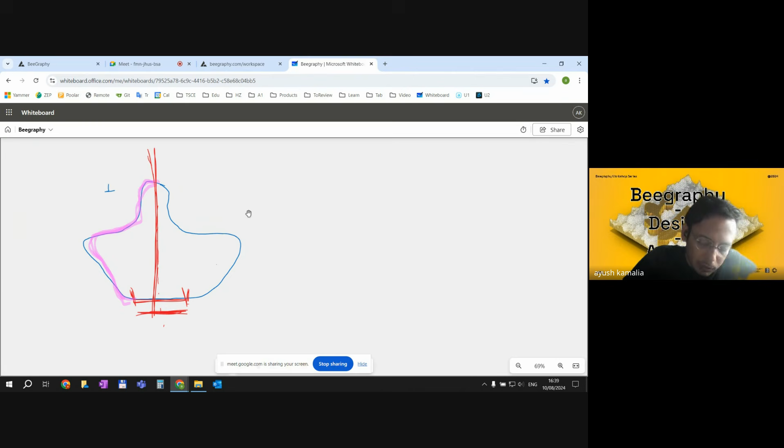If we have that, we can use the mirroring axis and get the other half of it. And finally, it is very simple to get this straight line. So what will happen is we will get these 3 things: the first, which we created, the second that we mirrored, and the third, which is a straight line. Once we combine all these 3 things together, we have our complete section profile of the bench.

So now we have parametrically reduced our problem, from a complicated complete bench to a small section that we want to achieve. Let's see how we can create it.

One methodology you already understood with Divya. So our target now is to create a form like this, the blue curve. I can create a lot of polylines and then chamfer them, but I want a bit more curvy things. So what I'm thinking to use is to have multiple points around and then somehow create a spline out of them, like a curve.

So what could we already understand from our first problem about lighting fixtures? We need anchor points around in order to control what the combined thing looks like. So how many points are we going to need?

Definitely the starting point, the ending point. I will need a point here, I will need a point here. But if we just use these 4 points, my form will be something like this.

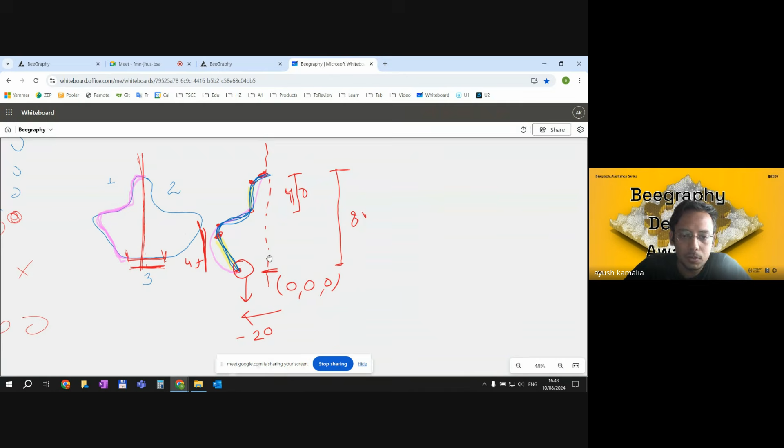So let me create this first point. Pretty standard, no problem at all. I just want it moved 20 centimeters toward the left side, which is minus X. So I can start by creating a construct point, right now at 0,0,0. But as we just saw, we want the 0 axis to be our mirroring axis. So in the X I'm just going to type minus 20 -- we're working in centimeters, so it's 20 centimeters. So when it gets mirrored, my base is 40 centimeters wide.

Perfect, I'm done with the first point. Now let's do the extreme point on top, which we know is just vertically stacked up at 80 centimeters high. Again, a construct point -- and Divya already explained wonderfully that none of these numbers need to be number inputs. If you want any of these parameters changeable by your client, or want to share it, you can put a range input, and in configurator mode these things can be changed and altered. So in my second extreme point, the XY remains at 0, it's just the Z point which is at 80 centimeters height, so I'm going to make the Z as plus 80.

Okay, I have the 2 points, now we just have to create the middle points around. Let's create this point here -- the extreme point where a person is sitting. What width do we want to give? We're saying it's 20 centimeters, so we can give it like 35 or 40 centimeters because it's moving out. And in terms of height, we already know we want this to be at 45 centimeters, where people are usually sitting. So let's create this point.

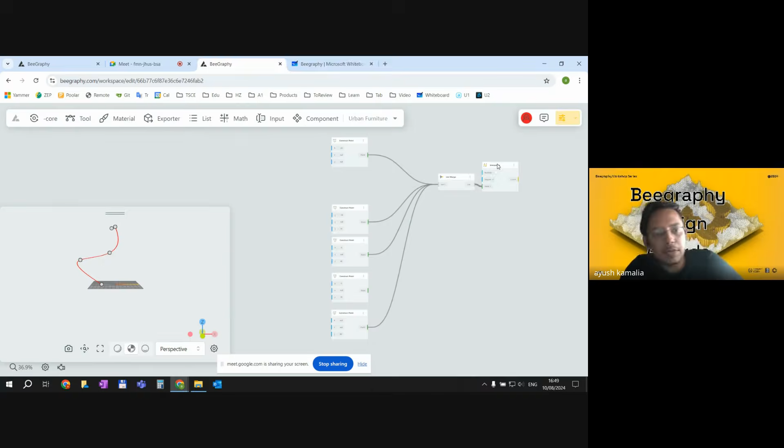So I added this one additional anchor point. Remember that I haven't yet added it to the merge list and the spline interpolation, so it is just a point yet. It is not causing any effect on the red line that we have.

Let's create another point here. Let's get it exactly down the same, so -50 remains -50. And the height for this point was 35. It should be slightly lower than this, so let us do 30 or 25.

Sounds good. Now let's try to put all of these points together. Again, these points are somewhere in between, so we have to make sure to add all of the points in the correct order. So I have to start again from the beginning. The first point goes here.

Ayush, maybe it will make it easier if you add ports on the list merge. Yeah. Yeah, but okay, maybe in our next step.

Cool, I have an interpolated curve. Let's hide all of them and then see what it looks like. I have a quite nice chair outline, similar to what I was looking for. We can maybe play around a bit.

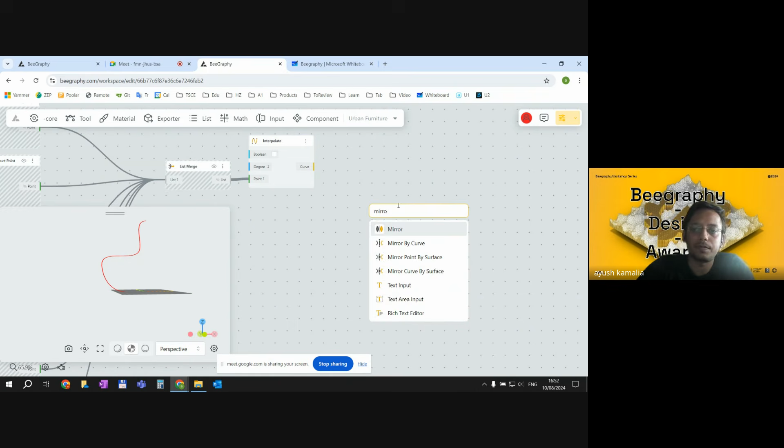So we have a curve already. Let's create a mirror out of it. I get the geometry, and by default it is set to the correct axis. Otherwise, we can just provide the correct plane input if we want to change it along a different axis. So to create the entire section, the only thing missing now is this straight line.

How can I draw this straight line? We already know that this is -20 here on x. So once I mirror it, the x point here will be +20. So we can create a line from 2 points directly.

I can add the 2 points here, x as -20, and here as +20. But I do not want anything in the y, so I put it as 0. And I think it does the job.

So these three things combined give our bench section what we were expecting to achieve. Let us just join them together. First, second, and third. Let us hide everything else. And now we have one curve which defines the section where people are sitting.

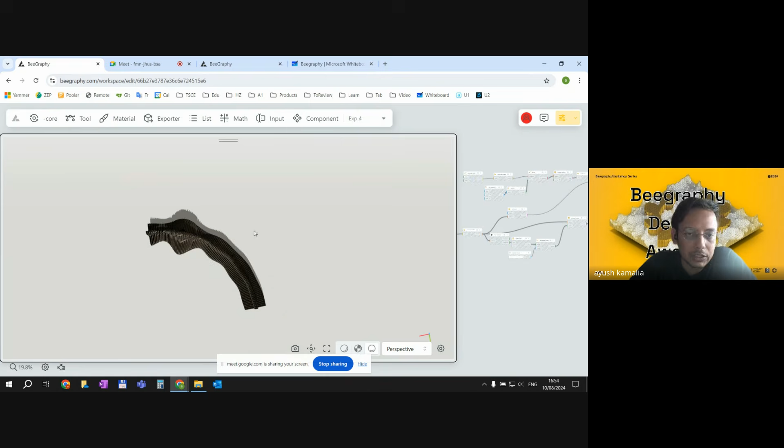So which kind of array should we use? A polar array. If it was linear, a straight line, we could have gone linear, but we have an arc in front of us. So let us hide this surface and just keep working on this frame around. We need a polar array.

The geometry is this one. Right now, what is happening is the array is happening with this as the center point, the origin 0,0,0. We do not want that, because then it's like rotating the same surface at its center itself. We want to put the point out somewhere here so that it gets rotated along that thing.

So let's create a point, or we can directly change the point. Look here, how about if we take it like 150 outside. We can increase the number of our elements, let's add it to 100.

We do not want a complete circular bench, just a portion of the entire circle. I'm not aware with radians, so we use the degree to radian command, which should come somewhere.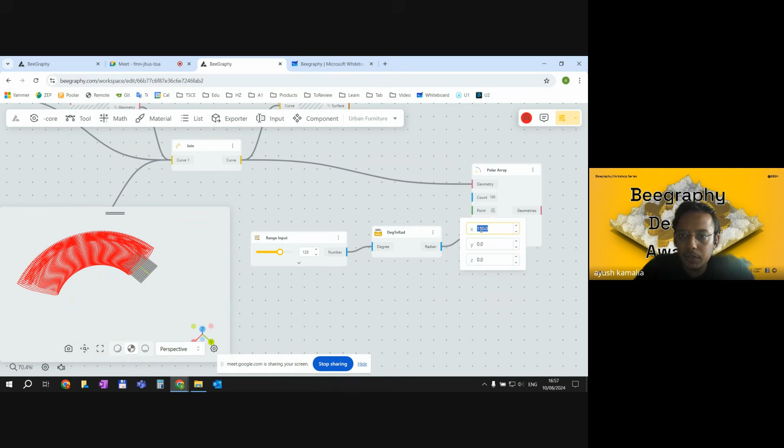So maybe let's just increase the radius slightly, from the center point, from 150 to let's say 250. Much better — I have a much larger, wide, spread out skeleton of a bench.

And there is nothing much parametric about it. It's like a very simple, extruded, lofted, swept thing. But yeah, it's a good starting point.

Now what we want to achieve — let's say if I show you, we have, let's say, all of these are our individual frames, which you'll see here. These all are our individual frames. They are all very boring at the moment because they are all of the same size, the same height.

What we can do is scale them, in a way that some get higher, some get lower, some get very lower, and so on, so that we can create this kind of dynamism and curvilinear form, like in our reference example, getting some variety and dynamism in the overall form.

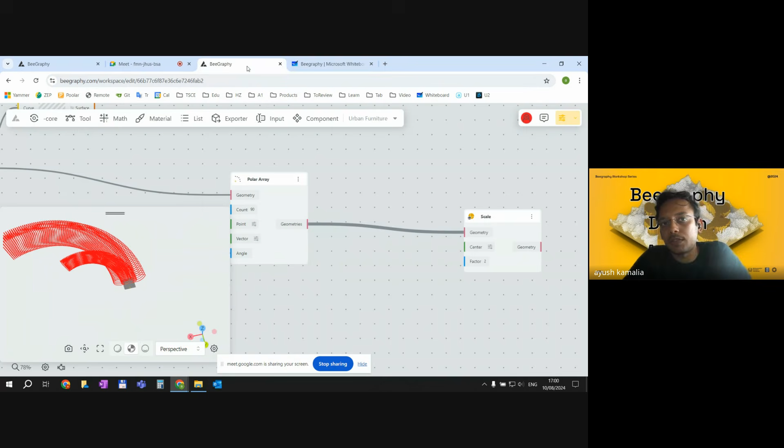We can use a simple command known as evaluate curve, which gives us the point on the curve. If I do this, what we get — let's just hide this thing — is a point somewhere here. Let's change this parameter for where we want the point to be, and if I change it to 1, now I have 90 points related to each of the frames.

So each frame is getting their individual scaling point. We have gotten our points, perfect. So let's put it in the center, and if I switch it on, it's now working as expected — all of the different frames are getting scaled based on their individual base point.

But if we simply scale all of them to the same factor, there is no play happening. We want this kind of play in which there is a unique scale factor following a rhythm or a pattern. And then there is a wonderful component, part of Grasshopper as well — it's known as a graph mapper.

So what it does is we provide an input in the form of x between the range 0 to 1, and it provides an output in the form of 0 to 1 again. There are multiple kinds of graphs possible, let's just use anything, let's use a Bezier curve, and see what happens. We are just creating a graph of the pattern we want in our bench, but there is no input in it yet.

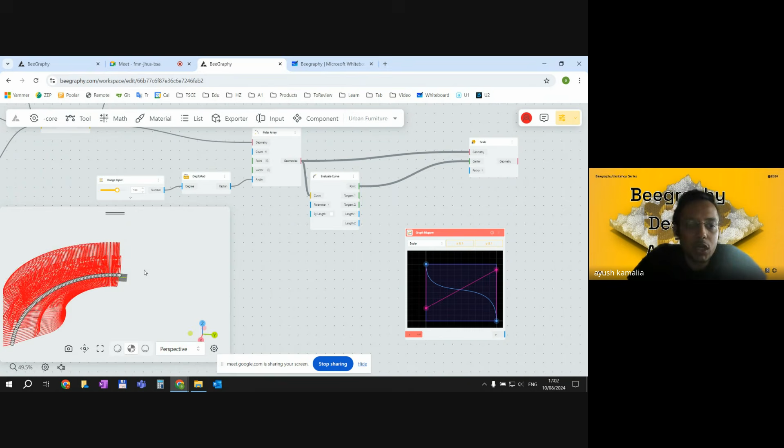How many scaling points do we want? Equal to the number of frames we have. So to count the number of scaling points necessary, we can use list length to identify how many points there are. Let's say if I add a panel here, we see we have a total of 90 objects. This is just parametricization.

If we change our bench to have 84 frames instead of 90, we automatically get that input, okay, we have 84 division points to take care of.

So we now know how many scaling factors we want. How can we create a scaling factor? We can use a normal series, known as list sequence, in which we start creating a sequence, like an order, a normal arithmetic progression - 1, 2, 3, 4, 5, 6, 7, 8, 9, 10, or 10, 20, 30, whatever it is. We know that our input range is 0 to 1.

So I have to start from 0 to match the x input range. How many of these points we want, how many scale factors, equal to the number of frames which we already know by measuring the list length - so we provide that input. And how is the step, how much each point is progressing? We want the max - we know the X range input is 0 to 1, so the highest point could be 1. So how about if we just divide 1 by the count? It just gives us the parameter by which each of the numbers should be increased in order to achieve a total of 1.

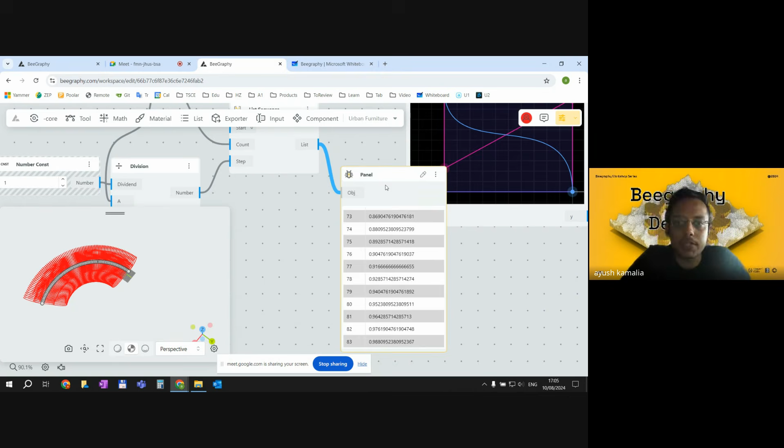So now it is giving us a list. Let's see in a panel how this list looks like. What we said is I want the number to start from 0, the total count should be 84, which is the length we entered here, and the maximum number should be 1. Let's see if it is happening or not. It is starting from 0, correct, checked. The length of the list is 84 - 0 plus 83, first we start from 0, so 83, perfect. And the maximum we are getting is up to 0.988, which is less than 1, perfect. So all 3 conditions we wanted for input in our graph mapper are being satisfied.

So now simply add our list and we get an output. Ideally we should get scale factors following this kind of curve. We already started scaling it, but it was at a constant factor right now. Let's add this y into the scale factor and see what happens. Something happened, we cannot see - let's switch off the visualization of everything except the final result. Perfect, looks pretty cool. We have a scaling system which is following this kind of curve.

Now we can do one thing - we can try multiple kinds of curves in the graph mapper. Let's say, what happens if it is a sine curve? Great, so it is following the curve exactly what we wanted to achieve. If I just move the curve around, I see different things coming here. Wonderful, so this is working pretty well.

One thing which I don't like is this scale factor - the portion in the middle of the bench is getting super small, so nobody can sit on it. It is dysfunctional. So if you want it to be just an artistic piece, you can go with something like this, but for me it is a functional piece. I want it to be slightly bigger.

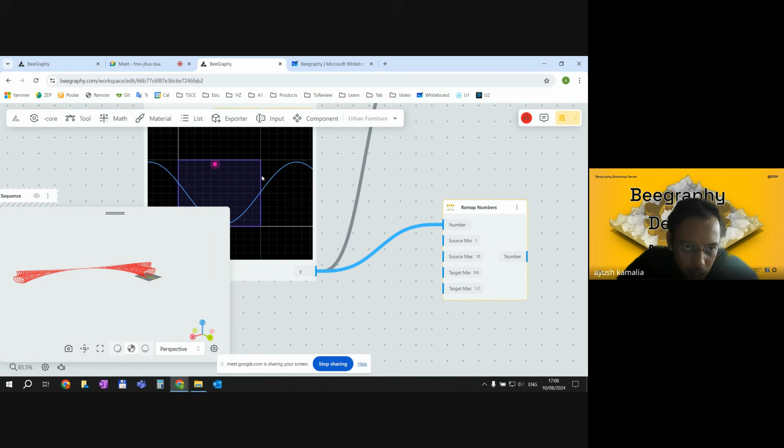Now it is asking us to give the source minimum and source maximum. What is the minimum number out of this output and the maximum number? Here we can use a component known as bounds, which is meant exactly to do this, giving us the bound, the range in which this series is happening. I provide the list, add minimum to the source minimum, and add maximum to the source maximum.

What happens if I apply here? Much better — so I have the form happening, and the minimum and maximum thing is also taking place.

Let us see what happens if we just change the sine curve. Here, some position — yes, functioning well. Now let's apply different kinds of... yes, it is, I like it. The Gaussian distribution — let us increase the intensity even further.

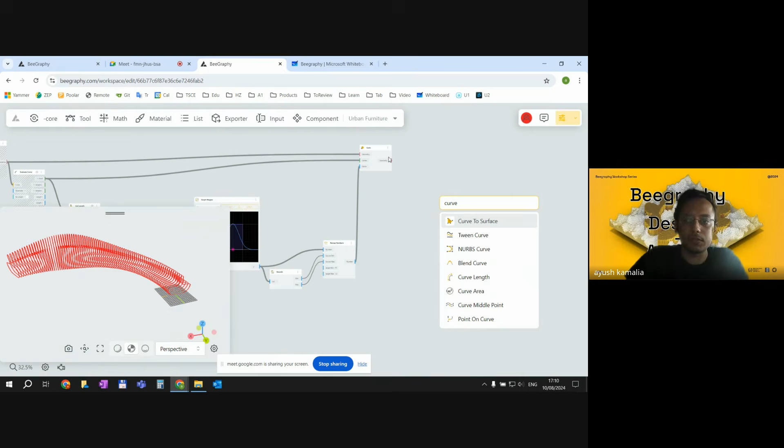Great, I have received all the surfaces. Now we need to provide thickness to all of them. How can we provide thickness? Our go-to, all-time favorite, easiest tool: extrude. We need to extrude — point, no. Curve, no. We need to extrude surface.

I provide this surface, and now the default extrusion is happening along the y, the z-axis. But is it correct? Not for my case. I want to give thickness to each one of them. How can we do that? The thing is, a normal y-axis thickness will not be good as well. Let me explain why.

Because we have applied a polar array, some of our panels are like this, some are like this, some are like this, and finally some is like this. If we apply extrusion along the y-axis, shown by this red arrow, for this element it will be okay, it will be extruded here, it will be extruded here. For this element it will be extruded like this. So rather than getting a perfect block, and when it gets perfectly vertical, we will get a surface that is just aligned on itself.

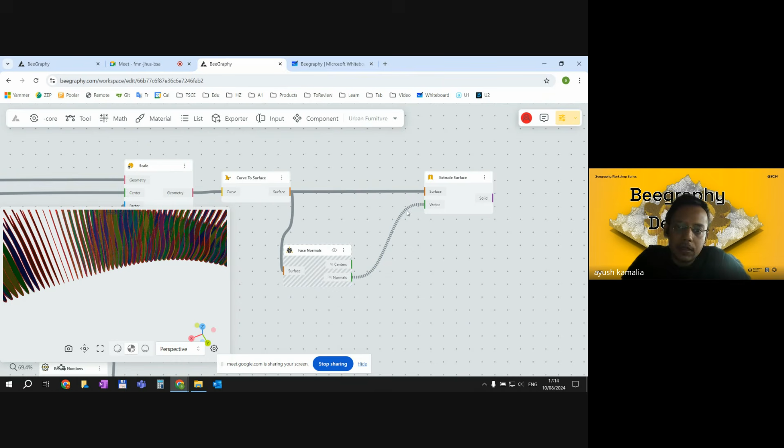If I apply the vectors to this vector, let's see what happens — all of them get extruded. Well, yes, but the thickness is very, very small, we can't even see the extrusion thickness. And the sad part is they are getting extruded multiple times, because this output is grafted, getting into multiple trees, so each surface is getting extruded all of the times. So what we can do is simply flatten it.

And then if I apply here, it should be only one extrusion per surface based on the normal direction individually that we calculated using the face normal component. Looks pretty good now. You see that there is slight thickness, but it is not enough. I want to control this thickness. I want to identify how much thick my plywood is, how much thick my board is.

So what we can do is we can put a component known as amplitude, or create vector with amplitude. Amplitude is the weight, is the length, and vector is the direction. So I get the direction from the face normal, and then I supply the length. So vector goes here, and length can be applied by a range, let's say 2 centimeters thick.

And let us see whether it is working with 2 centimeters, and then we can reduce it down later. I created this new vector, and let's just apply it.

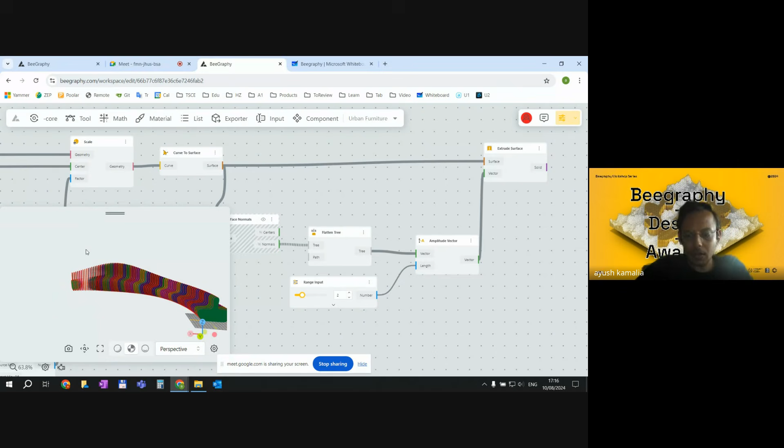Okay, so we have now received complete horizontal elements. But if we just go to our reference, we have some of these horizontal elements as well to hold everything together. We are towards the end of the workshop, so maybe just 5 more minutes and we have everything.

Again, we are trying to use a Boolean operation with solid intersection and then see whether we are getting through there or not. But otherwise, you already know all the concepts and it is pretty easy to do it. So if I want to do an intersection, we need 2 solids. So first one, that we want the elements to remain just inside our bench boundary.

So we can use our surfaces, which is this. So we have all the surfaces, I can create a solid out of it. So we can use like loft solid, and if I put all the surfaces here, let's see what happens. I get a solid out of it. Let me just switch off the visualization of everything else so we can concentrate in this final part.

Wonderful, we have the solid bench outline. And now we just have to create these horizontal boards which we can intersect with this.

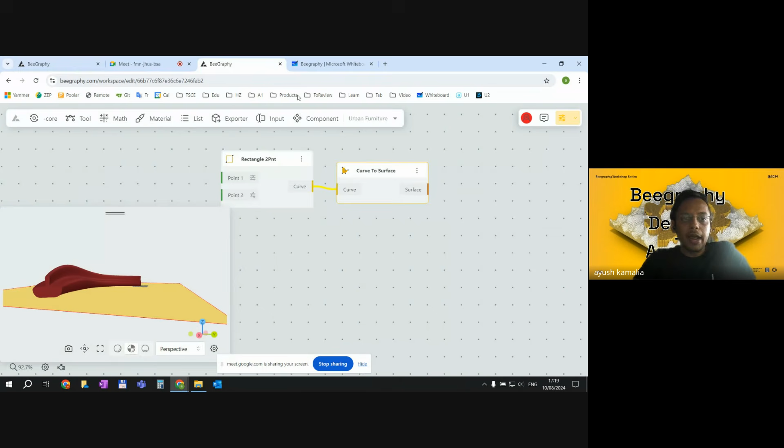And then we have to move it up. So we have to have multiple of these surfaces. As you see here, we have it at like a sequential height everywhere. So we can create again a series, which is a sequence of what all height we want to keep it, to move it up. We want to move it in the Z direction.

So move this in the Z. I just need to provide input from the series, how many we have. So let's say we can have a 10. I want 5 centimeter from the ground, and let's say each of them is 12 centimeter or 15 centimeter away from one another. If I do this input here, I see the surfaces happening.

Perfect. But these are all surfaces at the moment, they are not solid. So again, our all-time favorite component, extrude surface. We extrude it. Which direction we want it to extrude to Z. How much thickness we want our plywood to be - not 10 centimeter, too thick. We use 2 centimeter there, so we can again use 2 centimeter here.

Perfect. And now we want to do a solid intersection. Let's see if it works this time or not. Otherwise, we are already there.

Tools, Booleans, solid intersection. Yes, I apply this here. And now we have like one component and multiple other inputs. So let's see what happens if we graft it and then apply here. Let's just give it 1 second and then see what we have achieved till now.

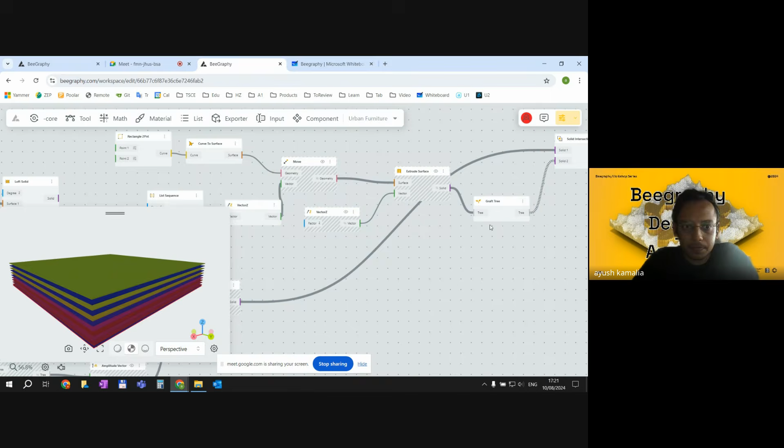No, I applied a wrong solid into the intersection. So, let's hide and then see what it's perfect.

This is exactly what we imagined to happen, and it happened as well. That we have these horizontal planes as well now. If I switch on the visualization of our vertical elements, now we see like a very nice urban table form. But it is still very simple for me.

I want to play with the graphs a bit. We know by now that the Boolean operation is pretty time consuming. So what I will do, I will disable this component till the time I'm playing with it. And as soon as I'm satisfied, I will just activate this component.

I like this to be much more happening, even much more dynamic. It is already pretty good, but let's say the sine graph, which is a very bling graph, a lot of things happening. And yeah, this is what I imagined. Now we can play around with this graph and then move it around left and right and do it till we are satisfied with the form.

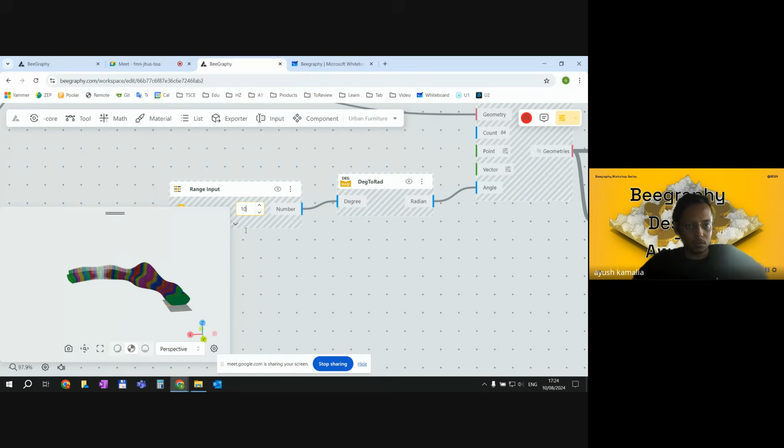I should have stopped the solver and then have provided the input, but it's okay, I can do it now.

But now let us go back to our drawing board and summarize everything we did pretty quickly, because it was a good exercise. We first created our section of the table, which was pretty, let's say, straightforward. There are multiple ways to do it. Then we created our polar array, in which all of the series were copied together. Pretty straightforward. Then the final thing was that we used a Bezier curve to create a scale factor for each of them, so there is a different scale factor applied to all of them.

Finally, we used surface normals to provide thickness to each of the individual panels correctly. So all our verticality was done. Then we used to provide our horizontal elements, and then we combined them together. The final step is we will apply material to them, and we are done with the exercise.

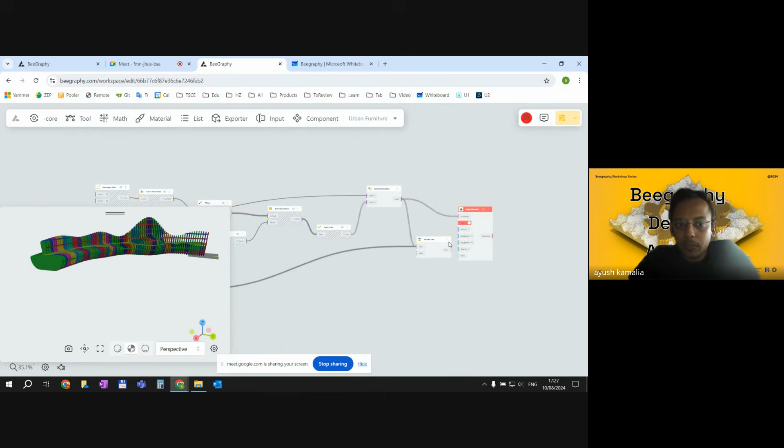We can just take two of the material components and then we can apply separate colors as well. Material, we need to apply, give a color. I need like a wooden brownish tone. Looks good. I can switch off the visualization of everything apart from the last material component.

And if I go to a rendered mode, looks pretty good. So here we are. I can turn off the view of the grid behind, I do not want to see axes. I want a pretty high quality. This is the final view we are getting. And then let's see how it's looking.

It's nice to have these kinds of furniture in our urban spaces. They make them much more lively. The good part is everything is parametric. So if you design one based on the site constraints, you can change a few sliders here and there and get a completely different form out. The most interesting thing is that by changing just one parameter in the graph, the entire identity and view gets changed. This is the default graph, but you can have your own input graph, a completely customized graph, to have a different pattern as an output.